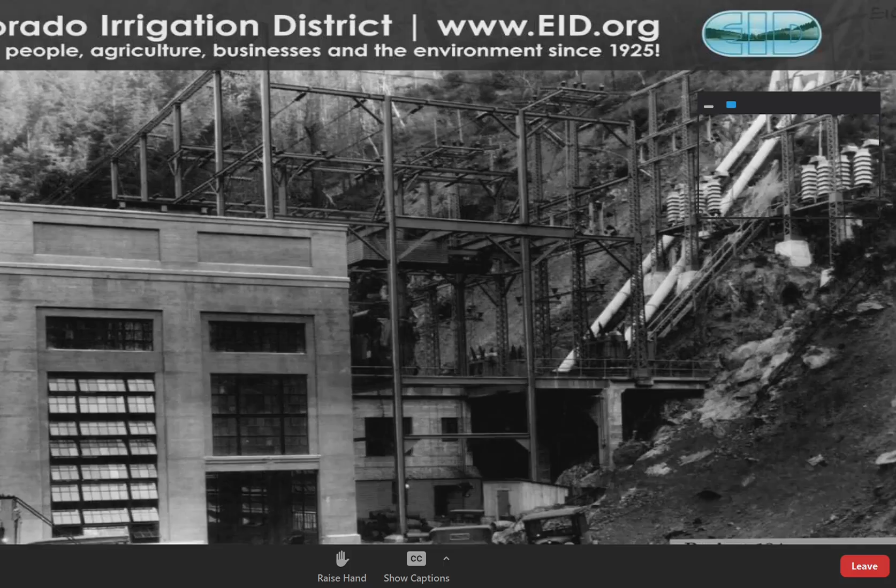Good morning, members of the board. Patrick Wilson, Drinking Water Manager, here to give you a little bit of background on the two recent transmission outages that we've experienced on the Diamond Springs main. Next slide, please.

The initial leak occurred on February 2nd, and it was actually on a blow-off appurtenance attached to the pipeline. Diamond Springs Main was built in 1961, originally constructed by the Bureau of Reclamation. It took treated water from the Reservoir 7 water treatment plant at that time and distributed it down to Cameron Park by way of the Reservoir 12 area, which is kind of above Bel Air, for reference, on Cameron Park Drive. This break occurred just on the other side of Ponderosa Road, between Reservoir 12, and it actually occurred on a standpipe, as you can see there on the right photo.

A seam failure on that pipeline, which is a normal occurrence, unfortunately, on that ductile iron pipe spool when the coating fails. So I did a count on the transmission lines that are constructed this way.

We have a total of 66 of these in the system, of which on the Diamond Springs main we have 24. That construction actually has the isolation valve at the top, as you can see there, and doesn't have it attached to the transmission main.

Current construction practices install that on the transmission main so that the blow-off itself, if there is ever a leak, does not require a transmission main shutdown to make a repair. Obviously, in this case, with the location of that isolation valve, it did require a transmission line shutdown.

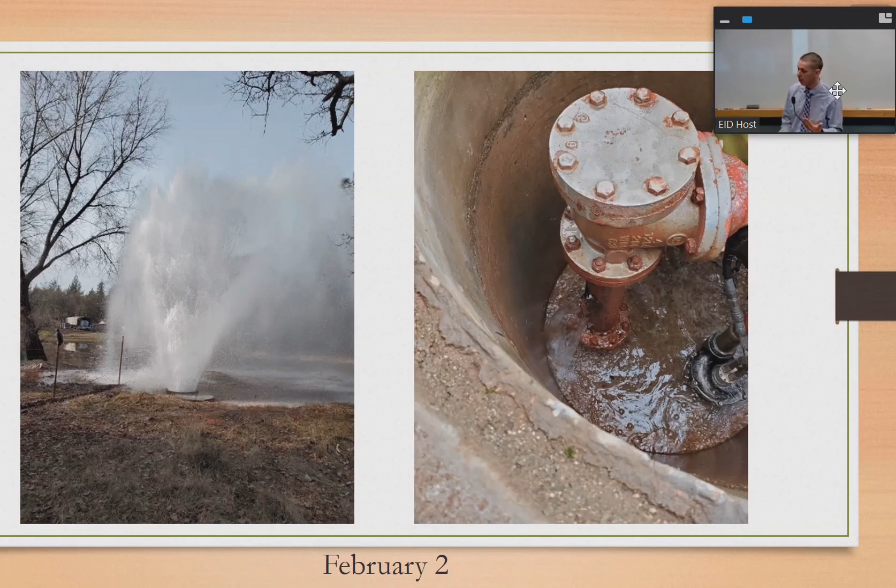It was determined that we needed to make this shutdown much sooner than we had anticipated when we arrived on site. Communicating with the school as well, we were able to come to an agreement on a shutdown for this particular endeavor, it's February 2nd, so Thursday of that week.

Next slide, please. Patrick, before you move on.

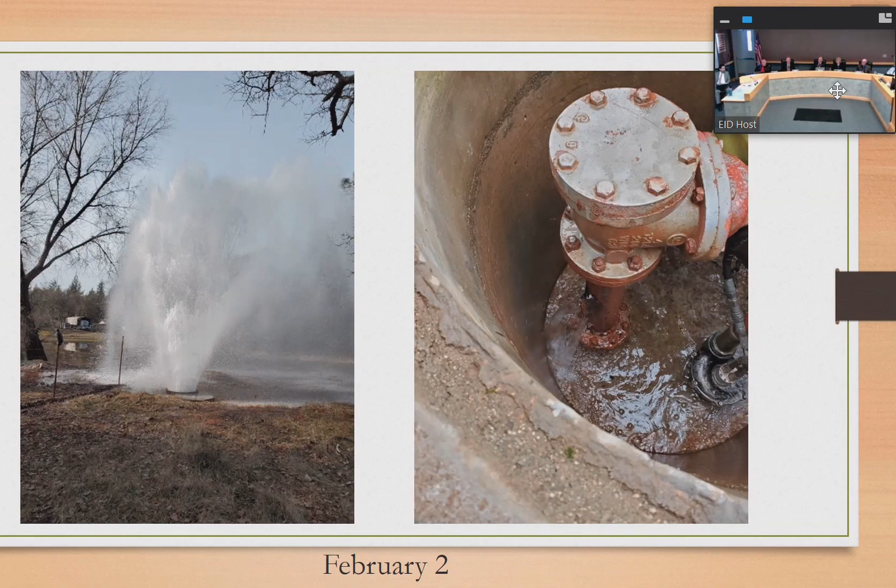Sure. You talked about the isolation valve in the vault at roughly, isn't it Highway 50 and Ponderosa about where that is? It's on the other side. So the Diamond Springs main kind of runs along Mother Lode for the majority of it, and then it actually crosses Highway 50 before the toy shop is kind of the best road reference I can give you.

Where the billboard's there, it actually cuts across in that open yard and then cuts across North Shingle through the backyards, subsequently where this pipeline is, and runs kind of basically parallel with Highway 50 at that point until it terminates at the reservoir. Seems like about a year ago, on New Year's Day or New Year's Eve, didn't we have a major leak right there?

Yeah, we had it North Shingle, absolutely, and I was going to get to that on my next slide. Sorry. No, it's all good, Director Dwyer. We'll get there. Yeah, if we could just go to the next slide, please, Jen.

So February 2nd was the Thursday. Subsequently, that following Tuesday, we recognized, between Reservoir 9 and Reservoir 12, we noticed a low pressure as well as Reservoir 9 draining, which subsequently told us that we had some sort of break in the pipeline. Along that pipeline, there are many turnouts.

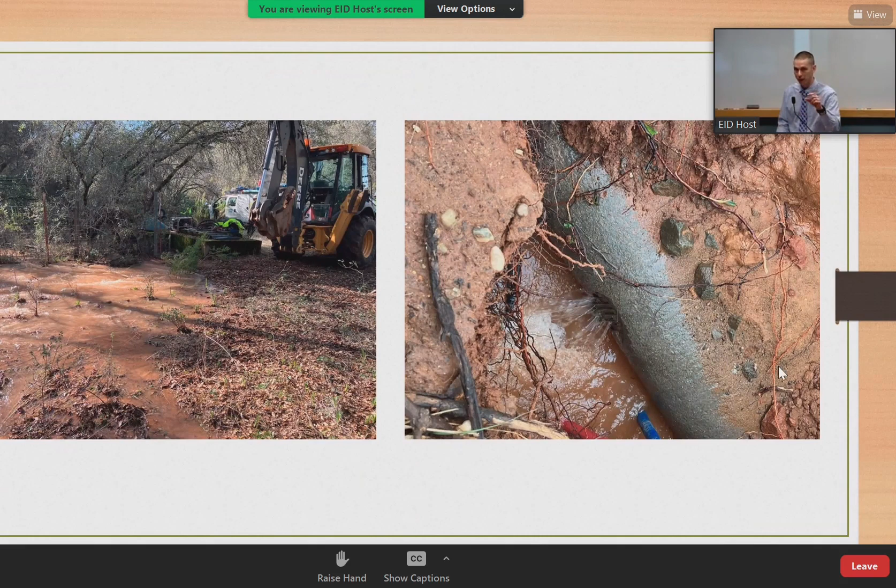Adjacent to the backhoe there, you can kind of see a concrete structure. That's one of the pressure-reducing stations that's along the pipeline. That station, there are 3 required in this shutdown. They require isolation as well as the former shutdown that we just spoke about.

Those are turnouts to other customers. Luckily, with that turnout, there's other ways to feed those customers. It's not a sole turnout. However, customers that are directly tapped, like Ponderosa High School off the transmission line, are subsequent to an outage, including those 180 customers. This repair, unfortunately, a little bit different than the last one, which was requiring just a replacement of a small spool section of 4-inch in nature.

This was actually a leak on the 16-inch line. This is a very strange leak for EID. Traditionally, what we normally see is a failure of the outside concrete on the pipeline, which allows groundwater to get in and corrode the outside of that steel cylinder on the outside of that pipeline.

However, in this case, next slide please, Jen.

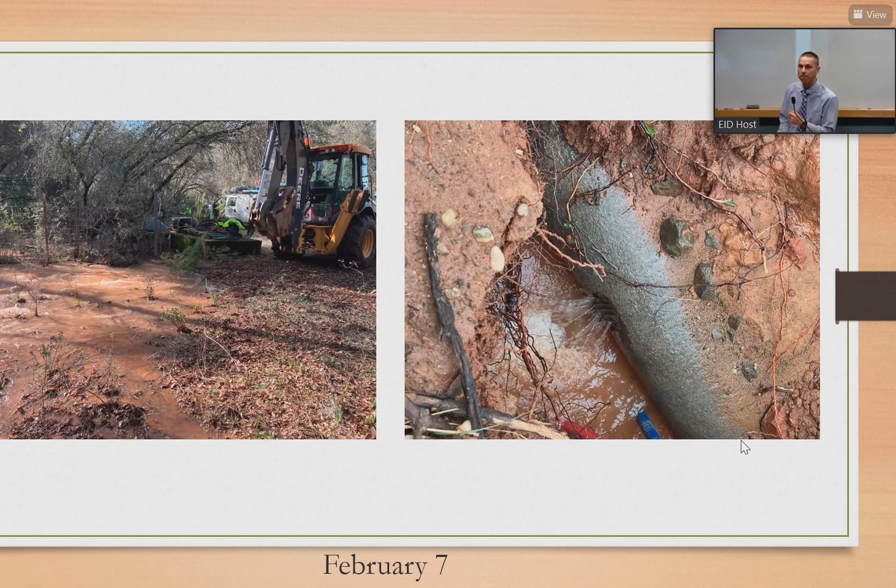In this case, it was an internal corrosion that had occurred, most likely from a failed installation.

The greatest challenge, I would argue, in installation of any of these concrete pipelines is really the actual bedding of the pipeline. The bedding consists of the grounding for the pipeline, placement of the pipeline, and then backfill of that pipeline.

What subsequently happened in 1961, not only with the Diamond Springs main, but also EDM1, El Dorado Main number 1 — both of those pipelines, for the majority of those installations, were backfilled in native material. The leak that Director Dwyer was speaking about from last year was actually a failure of the outside of that concrete mortar from a rock sitting on top of the pipeline from the original installation, which caused a crack in the mortar.

This instance is kind of the inverse of that, because it's actually a failure of the mortar inside the pipeline. That mortar failed most likely from installation or poor construction — poor application at the facility at the time. It's a little difficult to see in that photo on the left; I did my best to clean it up, but there's a bunch of mud shown on it.

That steel cylinder was pristine — it looked brand new. The bar wrap was also brand new. That led us to believe the internal corrosion had occurred on the backside. Looking at that location, we were able to see corrosion on the backside of that steel cylinder, indicating that water had been sitting there for a prolonged period of time.

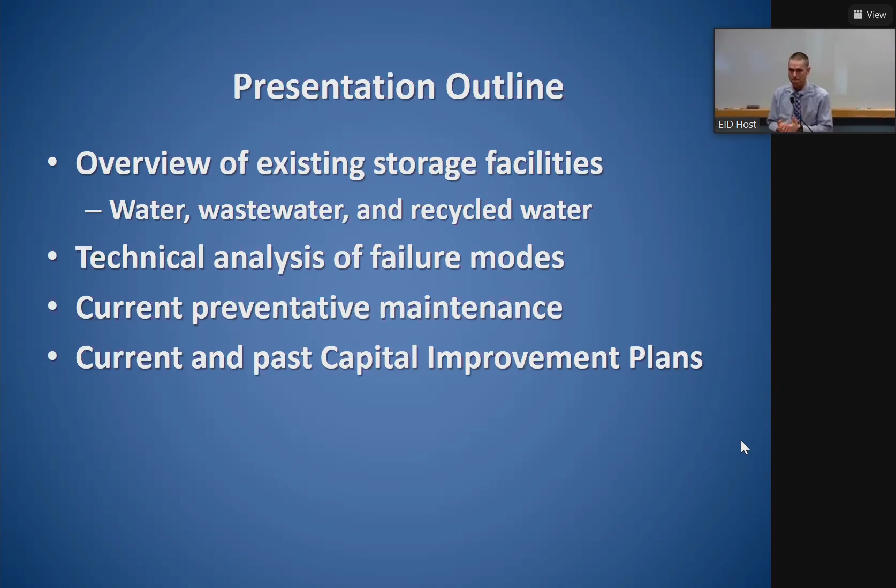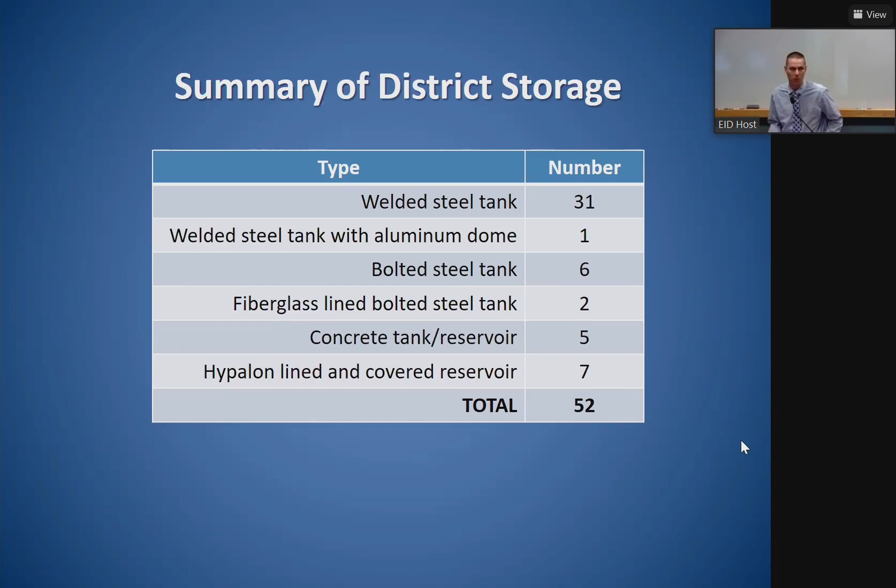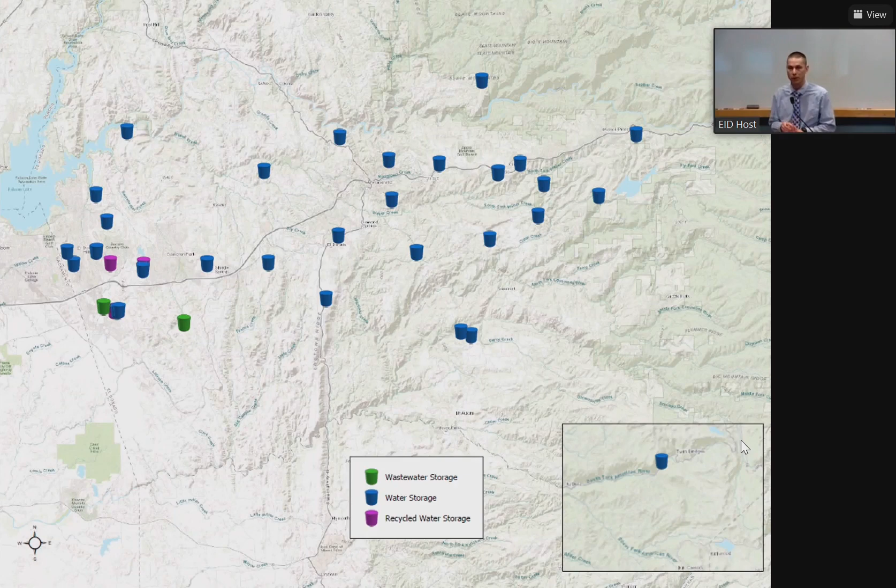Next slide, please. This is just an overview to show that we're spread out everywhere from Strawberry all the way down to the county line with storage, not just in drinking water, but parsed in there with wastewater shown in green and recycled shown in purple. Next slide, please.

Welded storage tanks, as I mentioned, we have 32 in total. They range in age from 13 to 63 years. The average life cycle, if coated every 15 years, the anticipated life cycle is 75, upwards of 100, depending on original construction material and selection of steel. 16 of those were constructed between 2000 and 2006, a lot of that had to do with the 1998 compliance order for open reservoirs. Obviously, getting away from that in the most cost-effective way was to install welded storage tanks.

As I'll get to later, there are some challenges with that, and some cost implications now. The industry standard, and part of that challenge, is to recoat every 15 years - that helps maintain the structure and mitigate corrosion. The district has not consistently met the standard, which I'll get to in a bit. We do perform dive inspections and cleaning every 5 years, and we have consistently met this standard. One of the main benefits of that diving and inspection is a routine video record, so we can look back at previous videos and also see any major changes - I'll get into one of those later as well.

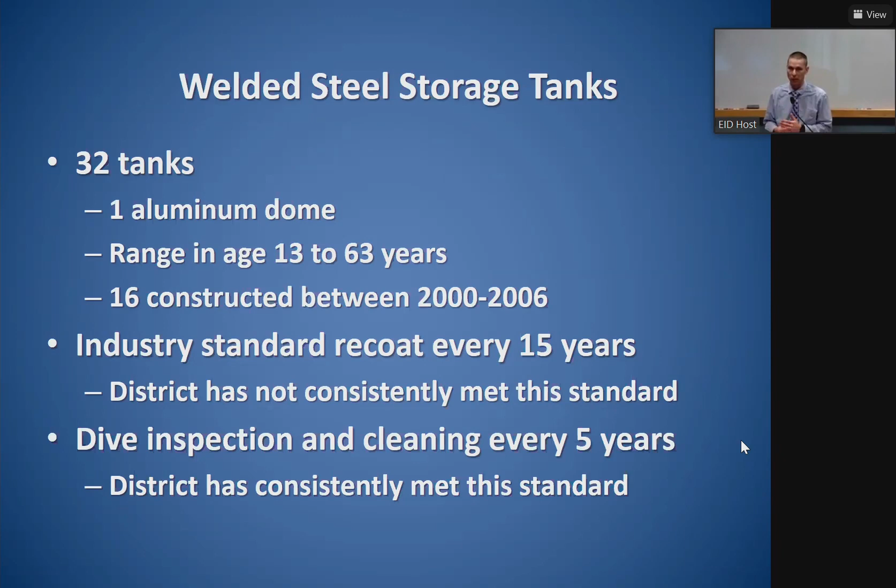Next slide, please. A brief recoating history: we started back in 2012 with Salmon Falls Tank, averaging about 1 a year. With the staffing changeover, we had a bit of a break due to retirement, and then in 2018, we picked back up again, and subsequently in 2022 and 2023.

One of the main struggles with this, not just a staffing challenge from a resource standpoint, is that having 16 welded storage tanks built in 6 years makes it very difficult to recoat those. You'd need to average 2.5 or so a year to recoat in order to stay on that same time frame. But it also lends to some of the financial challenges we have trying to adequately fund and maintain these reservoirs and tanks as we move forward.

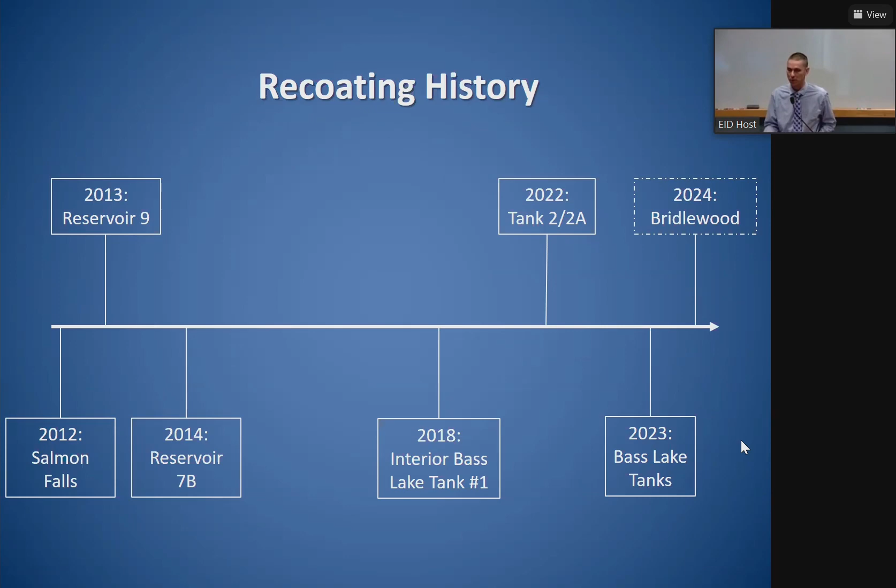Again, a lot of that relates to funding and staffing challenges. And part of it is original construction—we ended up owning 16 of these in a very short period of time, and trying to space those out into adequate, manageable chunks so we can recoat it has been a challenge. We'll get to that in a little bit.

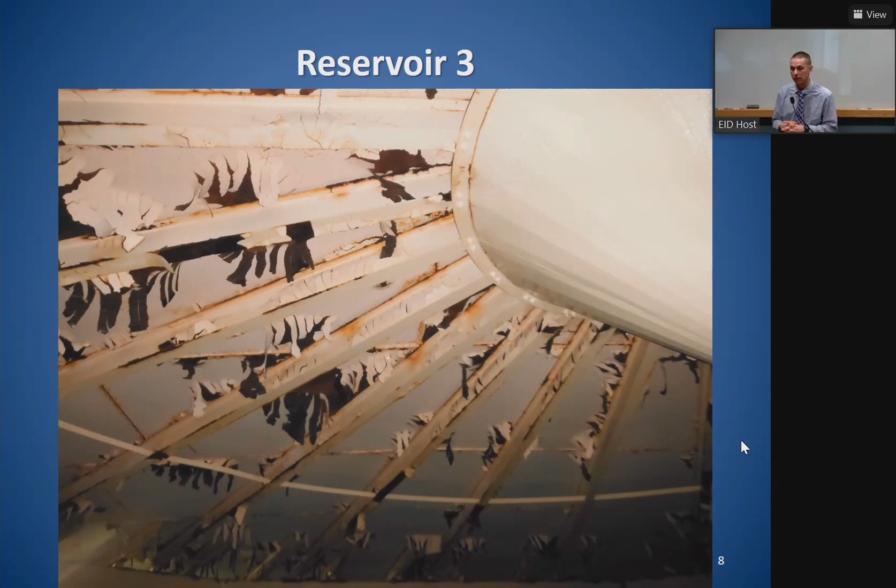So Reservoir 3, just to go back in time a little bit—and I'd like you to try to remember this photo for a later slide. For Reservoir 3, we had some failures of the coating, politely put, with delamination on the roof as well as the steel structure inside. With that delamination, the coating and steel itself fell to the floor of the tank, requiring a complete rebuild of the actual roof.

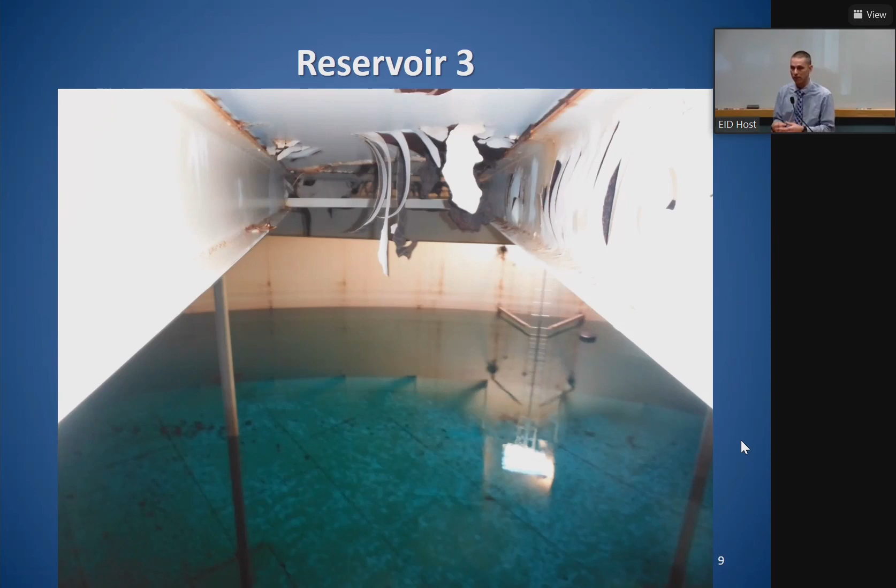To elongate the life of that steel structure, we add an aluminum roof. As part of this project, we actually had to add an additional top stave—a stave is essentially just a level, like in a house. That top level, above the overflow pipe sticking out there, was added for a multitude of reasons: one to adhere to installation of the aluminum dome, but also because repairs were needed to the actual steel structure itself. So we had to repair part of the original steel that was there in order to add the aluminum dome.

That aluminum dome will more than outlive the remaining life of that steel structure. It's a far superior product going forward, and where possible in the future, the district is advocating to do that on reservoirs and tanks. One of the challenges we got into, which we'll cover in a moment, is there are some limitations to the aluminum dome application—it's not one-for-one, not one-size-fits-all. Original construction sometimes hinders the ability to install the aluminum dome. The larger the diameter, the more challenging and costly it becomes.

Patrick, isn't there some—if you back up one—isn't there some public relations challenges with doing the aluminum dome in terms of aesthetics and reflection? I think that's nicknamed Jiffy Pop. It is, isn't it? Okay. Thank you. It's the one you like. It is the one I like.

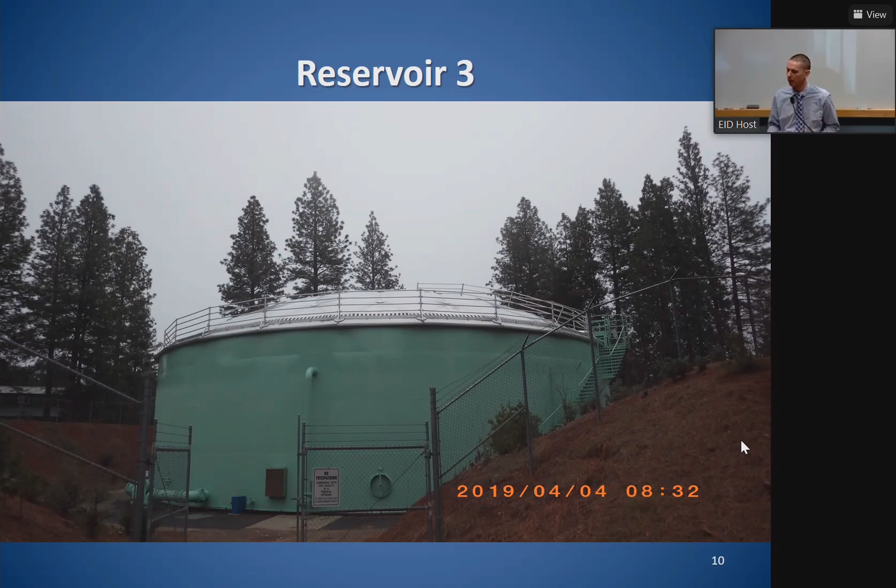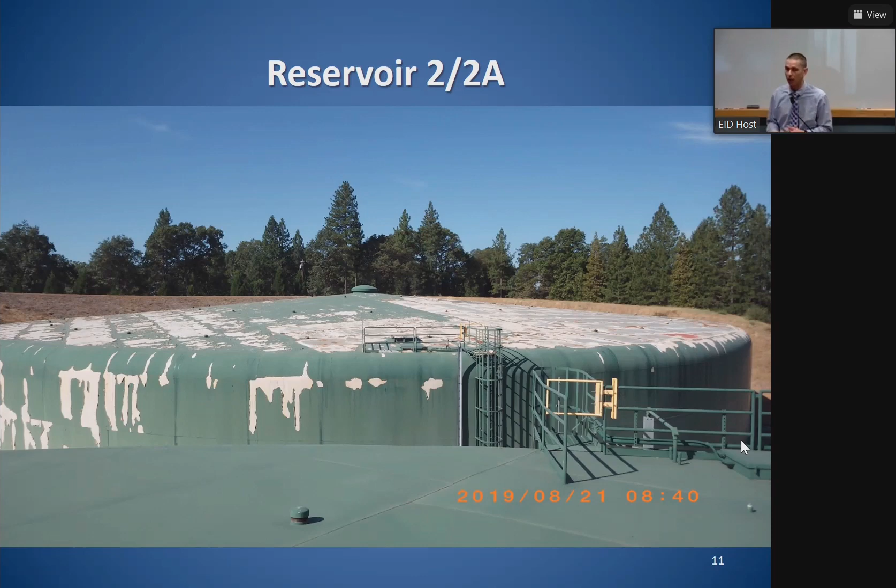So I'd mentioned, obviously Reservoir 3 with the coating failure, Reservoir 2, which we're all pretty familiar with most recently from a recoating perspective. This structure itself, obviously the coating failure occurred long before we ever got there to actually perform the recoat. This one initially, that's Reservoir 2A in the background there, and then we're standing on Reservoir 2 itself. That external failure was actually not the worst part of that structure. Reservoir 2A had internal delamination on the steel I-beams that required full replacement of about 36 inner I-beams, as well as a handful of middle and outer I-beams, as well as a recoating of the inside of that structure. However, Reservoir 2, next slide please.

Wait a minute, before you go back up one again please. That knife has cost this district a lot of money. So, as an effort to save some money, I brought you a ruler. That, number one, it shows up better in the photos, but it also will accurately describe the situation. And you can cut that in half so it'll fit in your pocket protector there, your engineer pocket. It's the right color for tomorrow, right? So we had to zoom in to see.

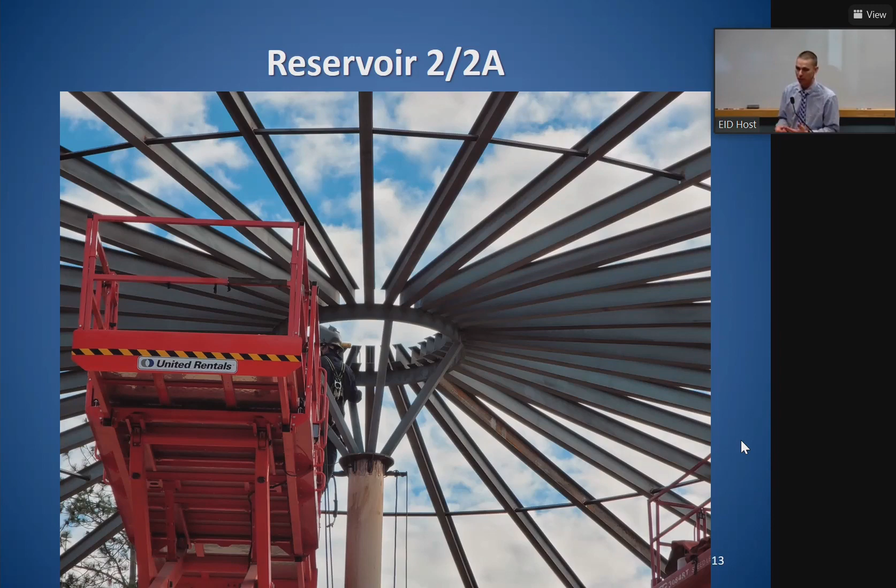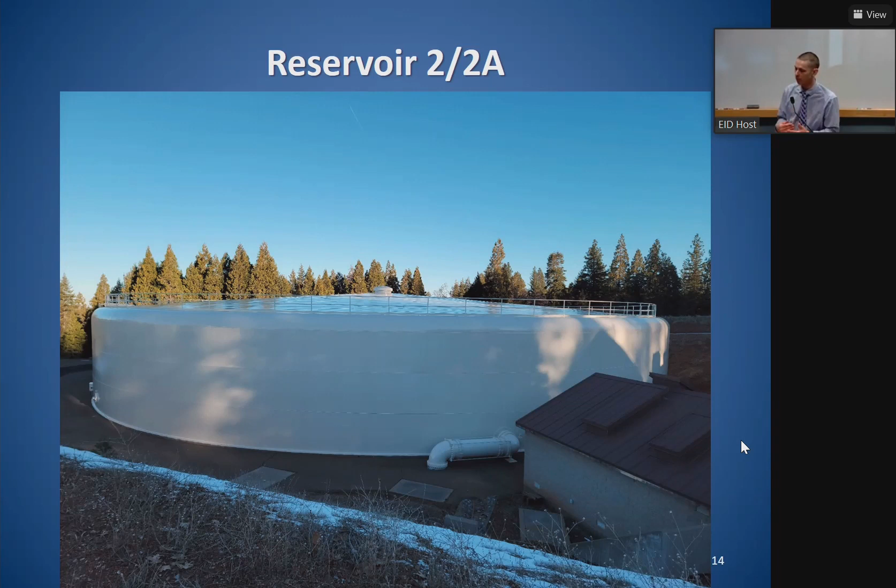And I've referenced the aluminum dome conversation that does go on, and we did actually have it during this review process where we move forward with the steel replacement. Due to the diameter of this reservoir, it was going to be very costly in order to retrofit it. The initial foundation and that design was not really privy to the removal of that roof. There was a lot of structural components that were tied together to make that structure stay upright. So with this project, we replaced it obviously in kind, but the significant difference that we have done now as opposed to the original construction efforts is we did coat the top flanges of all those I-beams, which led to the initial corrosion. The roof is free-floating, it moves across those I-beams. That coating is really the only thing you have to kind of save it. And without that, it was just rubbing through and creating extensive corrosion initially just from original construction.

I have a question. Okay, now that you've redone that, what's the warranty on this? There's still only a 1-year warranty on recoating. Okay, but how long is it gonna last? So every recoating is 15 years. For sure? I know you previously said one did not last that long, so.

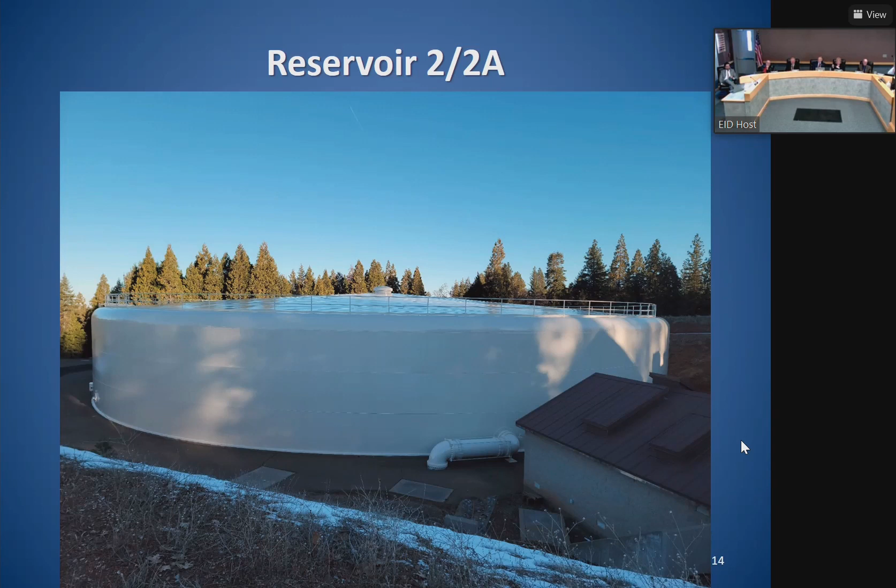Correct, absolutely. So that's the biggest struggle with welded steel reservoirs as opposed to concrete. With welded steel, there are so many options for recoating, and so many options for failures, challenges with those. It can be anything from simple paint adherence to dehumidification not properly working on the day of application, to off-gassing of the paint not occurring adequately. There's a lot of what-ifs that go along with that. However, in terms of coating application, adherence to specifications, and mitigating those potential risks, these reservoirs, as well as the ones we're doing going forward, are adhered to much more stringently than they were from the original construction. I will not tell you that any coating is bulletproof. I'll tell you concrete's near bulletproof, but I won't tell you that any sort of coating is bulletproof. But we did everything to mitigate and will continue to do so to mitigate all those challenges going forward.

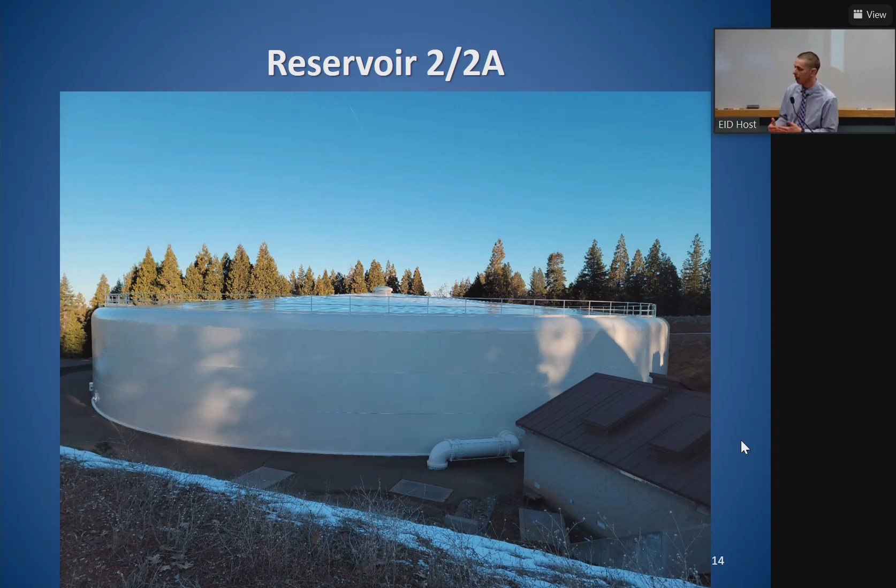They're there, and we're aware of them, as well as our coating inspectors, which in my opinion have done a great job since Bob took over. We've done a great job of having that conversation with them and understanding that level of detail, and we only hire those that do the greatest job for us. There's a very tight process we go through with requests for proposals as well, and we do a great job of vetting that to mitigate all those risks going forward. Thank you.

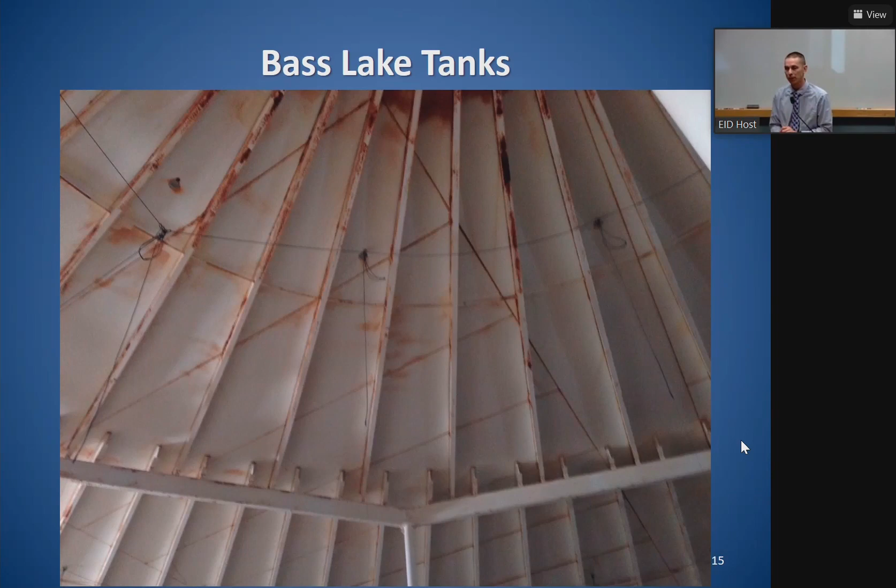Similar to Reservoir 2, but only completely different, is Bass Lake tanks, in that a very similar window when these tanks were constructed. As you can see, this is from Bass Lake tank number 1 when we recoated it back in 2018 - very minimal rust, as opposed to the complete delamination we saw from the famed knife in the previous photos. That's really just surface rust within Bass Lake tank number 1, not actually corrosion to the point of full replacement or repair.

I think that's the major difference - being able to get back with adequate coating inspection, which was performed on Bass Lake tanks, although again the top flanges were not coated on this tank as well. But getting back to recoating this and getting it into a period where we can minimize our challenges with the recoating process and minimize repair and replacement - that's the future, and that's the goal we're striving towards.

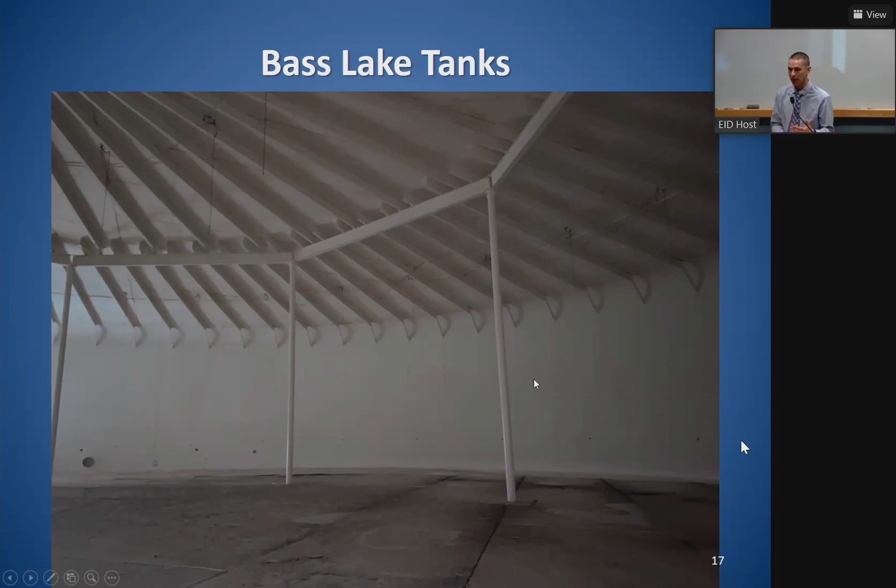Next slide, please. With that recoating comes a substantially truncated project. There's no steel replacement within Bass Lake tank number 1, and ideally in tank number 2 as we get into it in the next month or so. With that, we'll be able to do a much better job of maintaining these structures and staying on that recoating window.

Next slide, please. Along that line, in the board packet I went into a lot more detail, but I thought this one did a great job of explaining the challenges and where we're at.

From the initial Reservoir 2, as I mentioned, that required the full roof replacement. The project cost, with change orders and bid results, was about $853,000 per million gallon.

As opposed to Reservoir 2A, where we had some structural repair - replacement of a handful of I-beams - that was around $500,000 per million gallon. And if we hadn't had to do either one of those, we would have been around $386,000 per million gallon to recoat those tanks.

So being able to get back to recoating those on the adequate window of every 15 years, and maintaining that goal with sustained funding, will help us mitigate these immense costs, because not only do they cost more than double, but it's also the time commitment of having these reservoirs and tanks offline.

Luckily and conveniently at Reservoir 2, it was - I won't call it a simple system - but it was a relatively truncated system to manage. There were obviously challenges at Reservoir A water treatment plant in order to maintain level, however it wasn't something that was insurmountable, clearly.

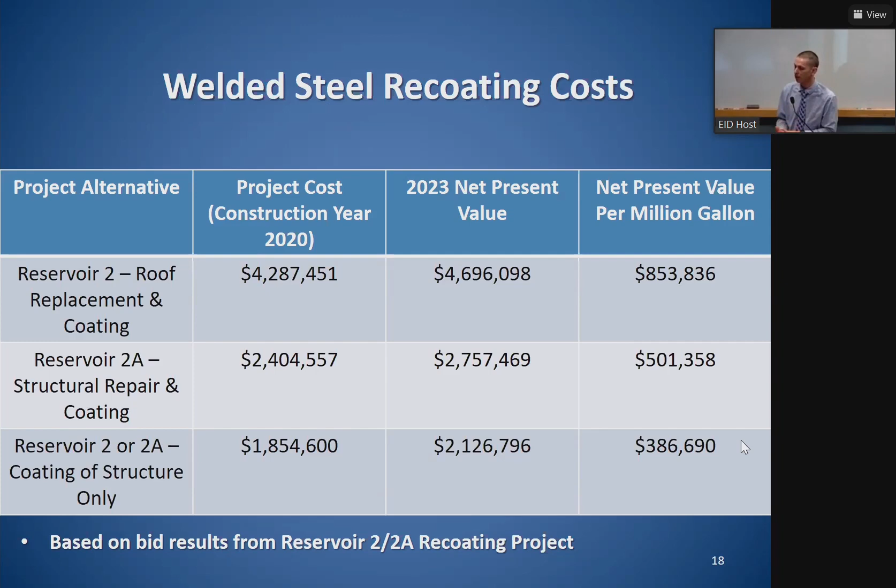If this had been at another tank site where potentially we didn't have as many options to maintain storage and the efficiency of the system, that would add additional difficulties to staff and potentially a lot of hours to maintain and keep service going. So a lot of this has to be looked at not just from the standpoint of the hard costs, which clearly we can see, but also the soft costs that go into operating the system and maintaining it as we go down the line.

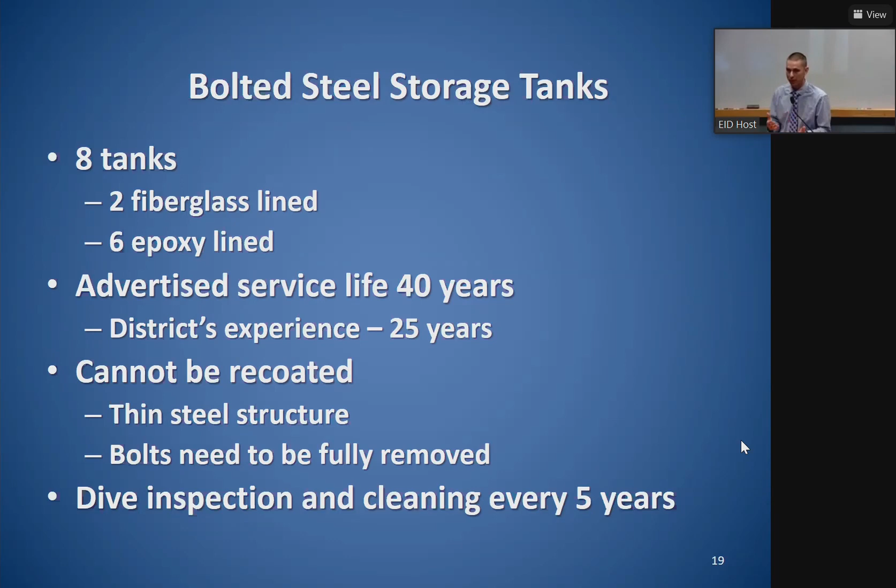In line with the rest of the system, we do continue dive inspections and cleanings every 5 years.

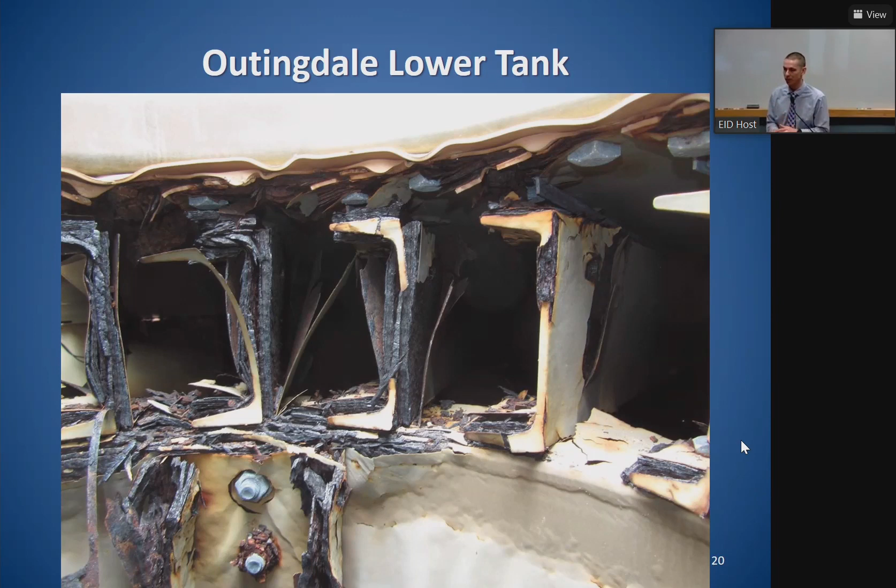One thing that spoke volumes to me about this slide, and the reason I kept it from the old Outingdale lower tank conversation, is the C-channel. I've been talking about I-beams in the welded storage tank - that's all a composite structure as well, and it plays out just the same as the bolted tanks in the way they load shed and the structural components work together. The C-channel is a much more cost-effective approach, however it's not very strong and sturdy long-term. It's subject to a lot more external corrosion due to the challenges with how the C-channel is adhered to the structure, as well as how the roof moves on that structure. So really, corrosion is going to occur in bolted steel or welded steel no matter what we do - it's really just a coating effort that we're after with all of these.

As some of the board may remember, just to the right of center of that structure, that's not a fifth support member - that's actually one of the roof supports that fell into the tank itself in Outingdale. That's part of the struggle with the C-channel - it just does not have the structural integrity you'd see in a welded steel tank.

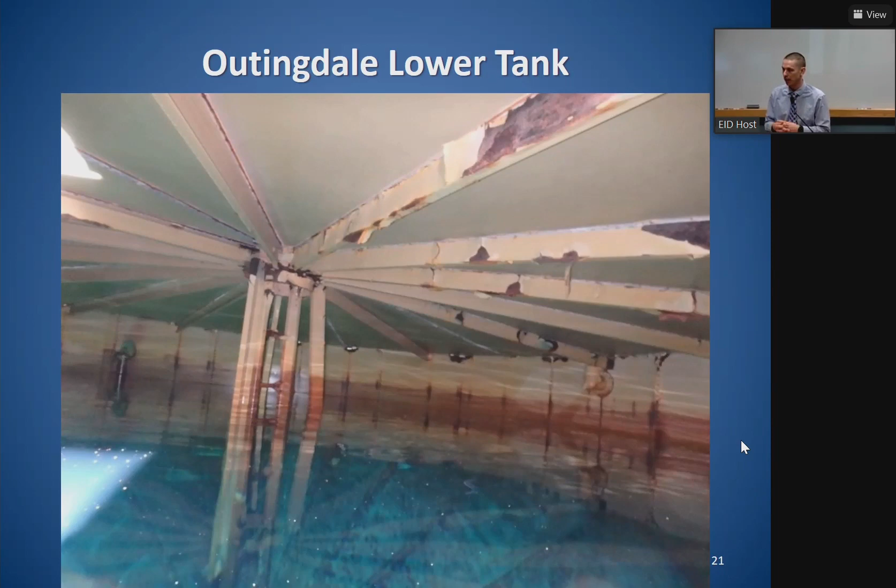With that, it's a one and done structure. There was really no way to repair it cost-effectively to extend the life of the Outingdale structure. Therefore, a full replacement was required at that site.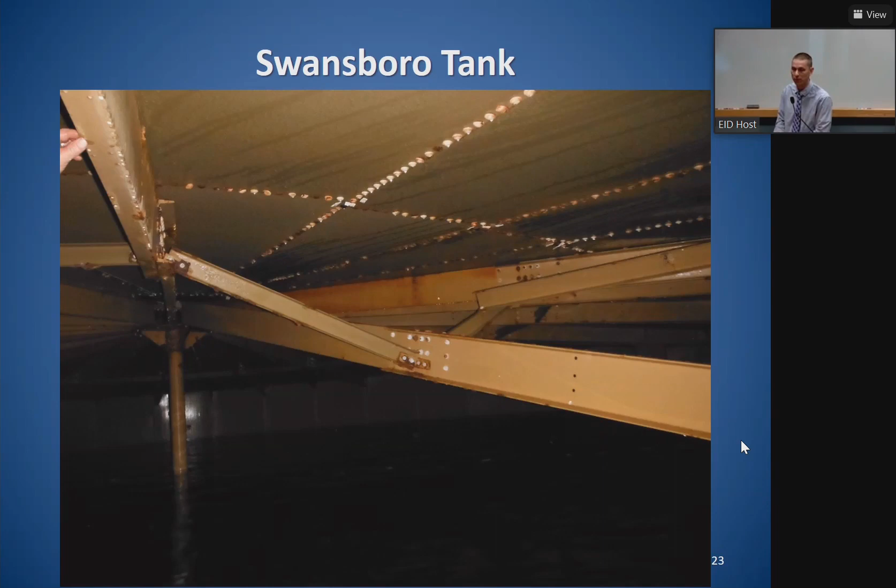To pivot a little, Swansboro Tank subsequently also had a C-channel roof rafter that failed and fell down. However, a little bit different - we were able to get to this tank in time to repair just the top stave, that top section, and we did a full replacement of the roof as well. That structure, at the time, was around 20 to 25 years old. We're anticipating to get another 15 years out of it, so we're still only going to get to 35 of the prescribed 40 years that comes from the tank manufacturers.

Even with that time frame and the replacement we did, there's still a lot of - as you can see, the bottom two staves are still there with their original coating, and those are still going to continue to be the largest challenge we have. That's where our leaks are going to occur, and that's where the welding is going to occur to maintain that tank going forward. However, that is the most cost-effective way to keep that structure in service, and it was an option at that time instead of a full replacement.

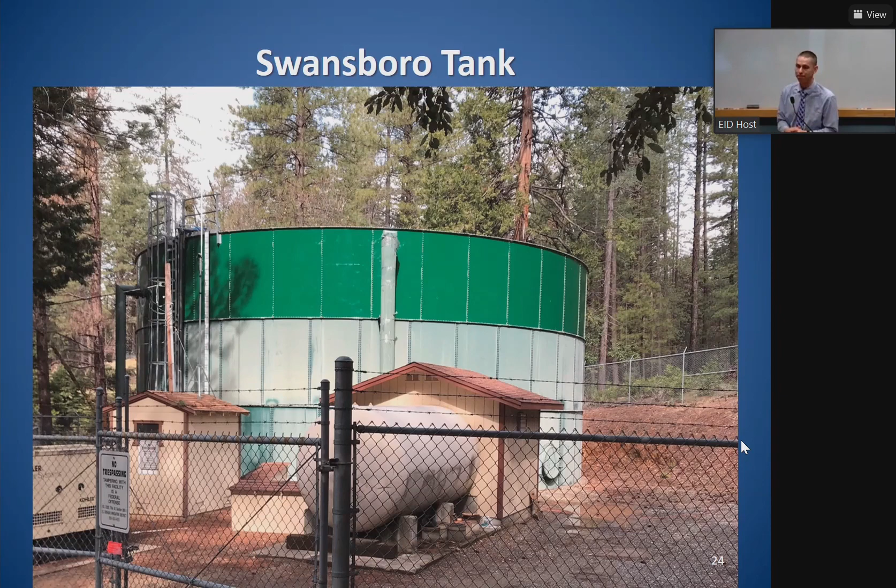So I spoke a little about fiberglass lined tanks. The difference between fiberglass lined and epoxy lined is that you have a fiberglass liner inside the tank - it's actually fused to the steel shell. That's all that it is, and it actually goes through the bolt holes itself, so it's got fiberglass in between the panels. That's great in terms of corrosion, however it does present a different challenge, which is shown in this photo - it still requires a significant amount of maintenance in an effort to mitigate any potential for leaks.

So we still have to coat every one of those bolts as well as every seam, because with that fiberglass, it's not a perfect closed structure. So there is a gasket there, but it's not a guarantee that in time it's not going to leak. So there's a relatively routine effort in recoating each one of these bolts and these seams to maintain the life of this tank. The glass, they call it glass fused, it's a fiberglass lined. The whole premise of this was to elongate the life cycle of the replacement of these tanks. That does come obviously at a cost with the repair and the maintenance side of it as well.

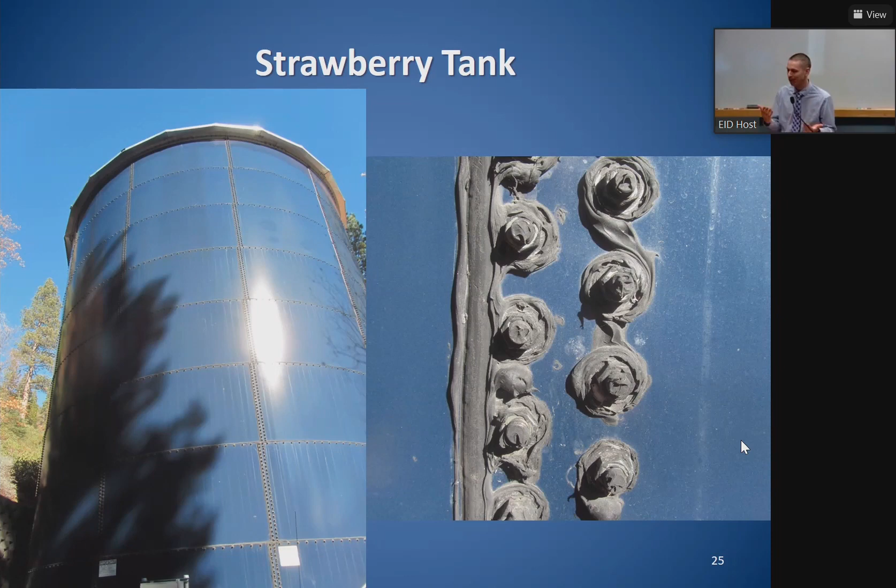And I think that the idea of fiberglass is great, but the actual application of it still isn't there yet, unfortunately. This was installed in 1993. We have one that was installed around 2005. It's subject to the exact same leaks that we're still seeing today on both.

Next slide, please. So Hypalon storage reservoirs, we do have 7 of these. These are the floating covers. They range in age from 31 to 34 years, and they're far beyond their design service life.

So each one of them was subsequently put in somewhat different phases. So they were grouped together, 2 different groups. And each one of them had different materials that were selected in terms of the thickness and the actual UV resistance that was installed back in that time frame. So some of them are performing better than others.

However, the overwhelming majority do have a significant O&M maintenance side of things that is very challenging. So with the floating cover operations maintenance manual that we had to put together for the Division of Drinking Water to continue to maintain and operate these, it really limited us to the operation of these reservoirs. You know, with any major fluctuations, you risk the ability to tear the cover.

And so one of the things that we do is we do have a tendency to keep these reservoirs a lot more full than we would a normal welded tank, bolted tank, that kind of structure, which adds to the water quality challenge side of things with actually maintaining water age and so on. So these are really, they're very difficult to operate in the sense that you have a very limited window to operate them in. Obviously, in an emergency condition, you're going to use the water. However, on a day-to-day operation, you're really shortening up your operational characteristics for them.

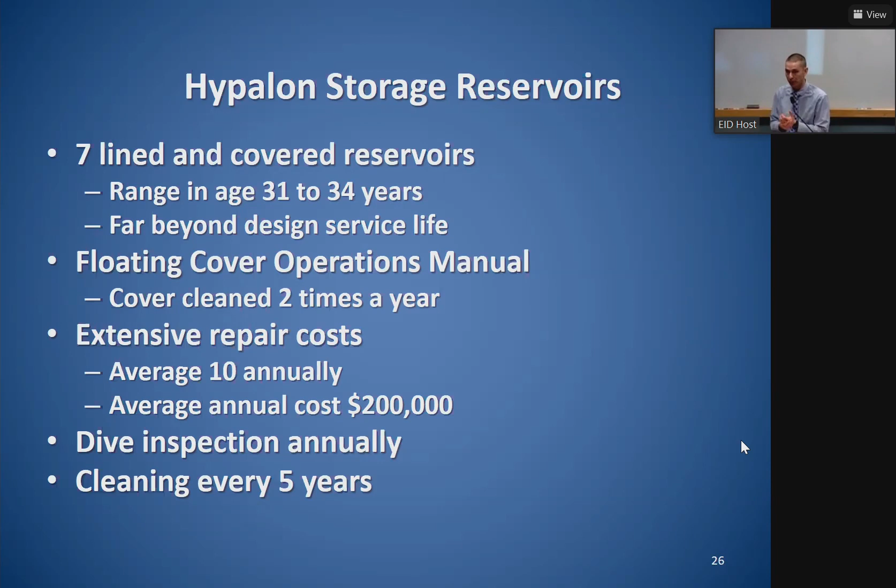Next slide, please. So Reservoir 1, this photo was taken back in 2017. This is part of the water treatment process, just to give you a little bit of background. So coming out of the filters, the water comes across Gilmore Road and into the Reservoir 1. It's a clear well as well as a storage reservoir for the district. With this Hypalon cover, it's well beyond its life cycle. In fact, this is probably the worst plagued one that we have at the district. It is in the CIP, which I'll get into a little bit later.

These leaks, and much like this one shown here, this is October 13th, and it has not rained all summer, just to give you kind of a reference there.

So those are the kind of leaks that we experience externally on these, on the top of the floating cover. And that requires actually, in some cases, a diver to go in and patch it from the inside, depending on the severity of the leak.

Next slide, please. And Reservoir 11, this is actually multiple weeks after a storm. In fact, this was after the last major storms that we had in January, towards the end of the month. One of the things I wanted to note here is those aren't leaks, that's actually ponding of water from the rain.

So the other struggle that we have with the Hypalon covers is actually getting the rainwater off. In the higher elevations, we struggle with whatever pumps or siphons that we have to get the water off. They plug with pine needles.

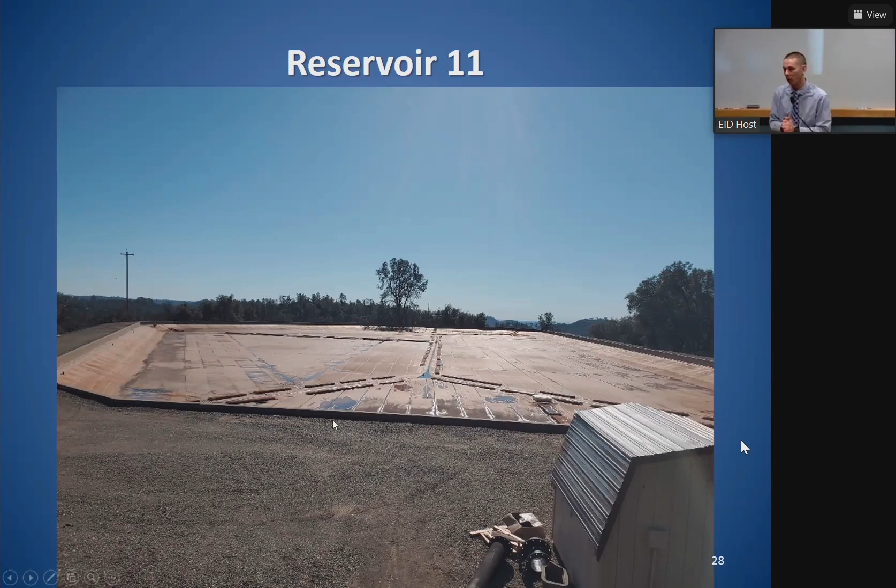In the lower elevations, we have trouble actually getting the water into the troughs. That's just by design. The troughs are shown there, and they kind of act like a gutter on a roadway where they concentrate the water to a location where you can remove it. Well, that water, as you can see, didn't get its way into the trough. You can see just a couple locations there where the water's just sitting on top, adding more and more challenges to these floating covers.

Next slide. So, concrete tanks and reservoirs. We have 5 concrete tank storage units: 2 tanks, 1 reservoir, and 2 water treatment plant clear wells. They range in age from 18 to 34 years and have had minimal maintenance costs since their original installation. The vast majority of it has been preventative crack sealing and minor crack sealing on some of the clear wells. We do dive and inspect every 5 years on these as well.

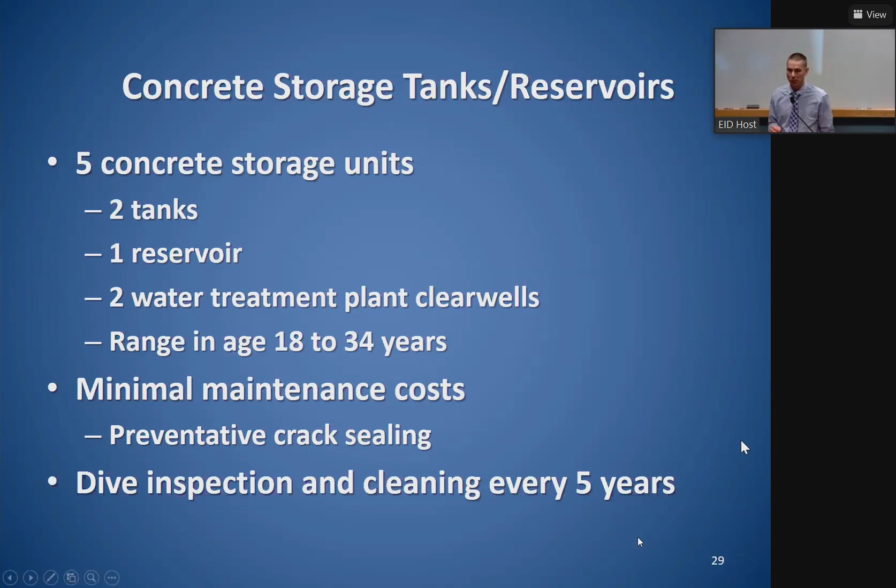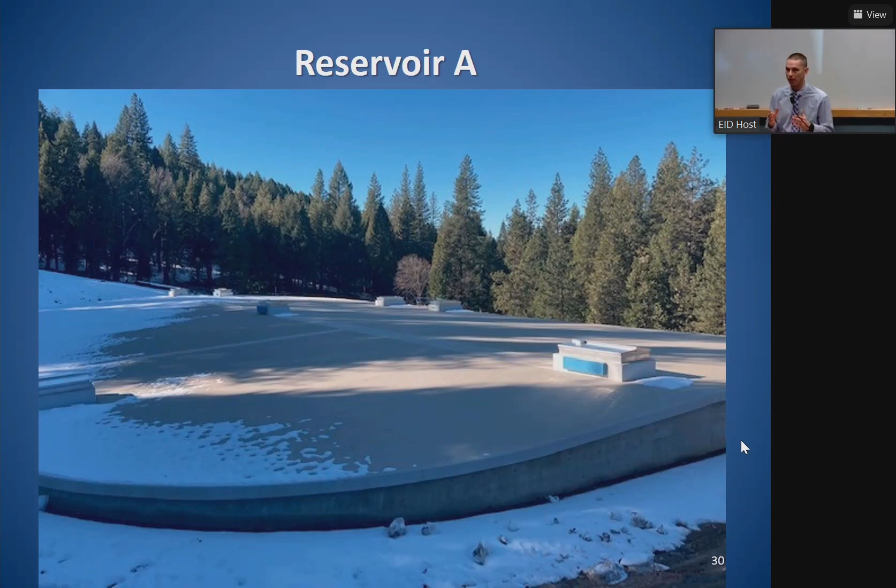Next slide, please. So Reservoir A, a little difficult to see with the snow, obviously, but we actually did a preventative coating on top of this one for crack sealing, so we sealed up all the external of that concrete in a very cost-effective way. We did it in-house. It was a small construction project over a couple of weeks. As time permitted, we completed that in-house without any sort of bidding, that kind of thing. Very manageable from the crack sealing perspective at Reservoir A.

Next slide, please. And Reservoir 12, so Reservoir 12 is kind of a different structure altogether. It's pre-stressed, which I'll get into in a couple slides, a structure that is really kind of the future for El Dorado Irrigation District. These structures are pre-stressed during construction, so they actually hold the concrete to itself. And then the roof actually has that gravel laid across the top of it, which is really an energy dissipator for that structure to help mitigate during rain events.

And with that structure, one of the main reasons, obviously being Reservoir 12 Cameron Park, one of the main benefits here is we were able to bury the structure right back. They don't have to be buried. In fact, the one I'll show you a little bit later is an open structure, just like any tank that you would see today at the district, welded steel or bolted. These really do a great job of interconnecting all the, if you want to call it, futuristic avenues that we have with concrete and rebar, in an effort to meld it together to make really an impermeable structure that will last well over 100 years.

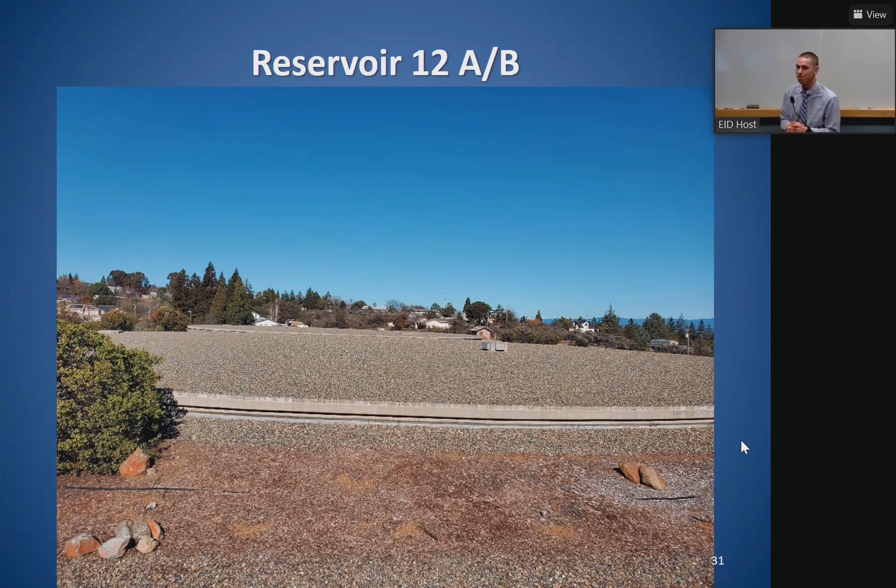However, if you just look at the structure itself and see the external costs from just recoating, it is very expensive long term. Years ago, when the district initially constructed a lot of these welded storage units, we were pushed that direction because of cost, since pre-stressed concrete hadn't really turned the corner yet. In 2005, we did Bass Lake tanks and Reservoir 12A and 12B, and that cost was substantially more than what we had paid for the welded tanks at that time. But going forward, especially with the cost difference coming down substantially with pre-stressed tanks, that's the direction we're advocating to go when necessary.

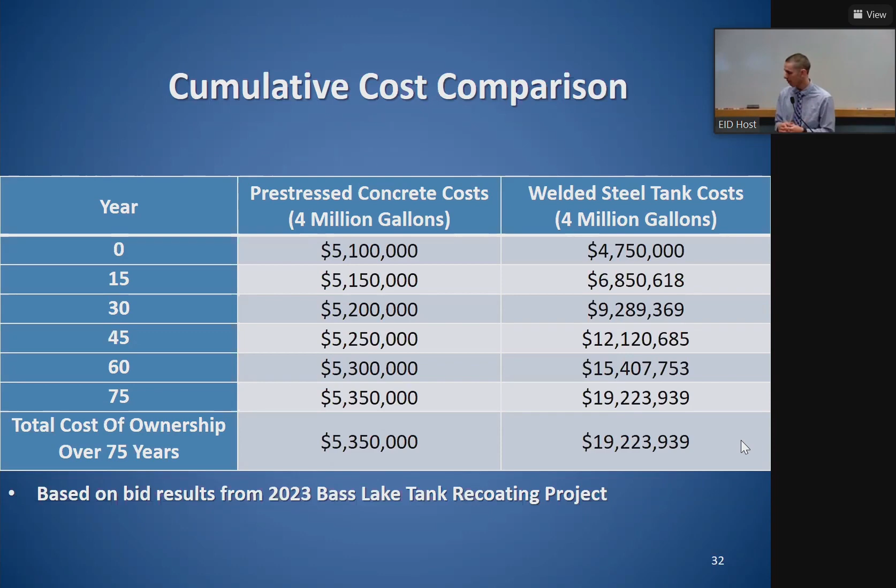That's where it's tied to itself to hold the structural integrity. At the completion of tensioning, they put a concrete external coating over that rebar. The concrete is monolithically poured internally, so there are no cold joints—it's a continuous pour. With the rebar tensioned on the outside, it adds a secondary source to make that composite unit, creating a very strong structure that won't be subject to the challenges we have with welded steel tanks.

The recoating for these is very minimal, if ever, depending on the construction. Additionally, with that composite structure and monolithic pour, leaking is very minimal. Years ago, the knock on concrete was that eventually it's going to leak. But with the monolithic pour, the base and foundation for that pre-stressed structure is actually cast into the sides, so it's all one unit.

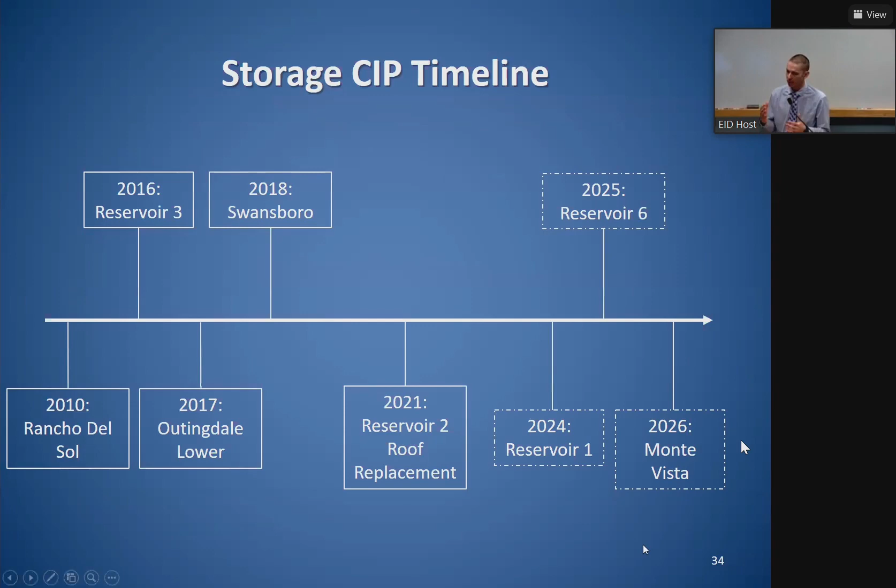Reservoir 6 has its own fair share of challenges. It was part of that grouping of 2000-2006 original construction of welded steel tank. It's been exposed to a lot of challenges with initial construction methods used there, as well as coating. That structure may not be savable depending on some additional review. It's likely that may have to be fully replaced depending on costs, which we'll come back with later.

If you remember the photos of Reservoir 3, I didn't have a great one showing that, but that was a very similar failure mode we had in Reservoir 3, where it required replacement of that top stave, that top section, with that aluminum dome. We're very much potentially looking at the same for Reservoir 4.

We will regroup this August, obviously. We'll do a complete review of all our tanks and see if there's the ability to move this up, to try to mitigate that challenge of not having a full replacement need, but potentially catch that beforehand. Obviously that's going to require some moving of items and an adjustment to adhere to that kind of schedule. That's part of the challenge we have - not just the funding, but also the staff resources to complete that project.

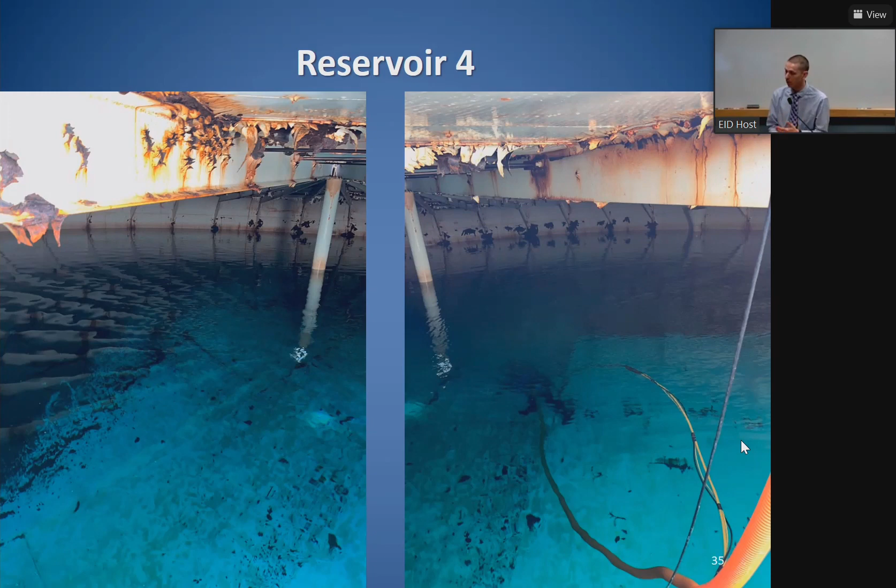This is very much going to be a one-off project from the standpoint of if we do move forward with an aluminum dome here and it's acceptable. It's a very detailed project, design-wise as well.

So in conclusion, each material comes with its own challenges. Obviously there's costs associated with it, amongst all others. Staff is going to continue to evaluate all factors going forward. Along with the mission statement and guiding principles, we're maintaining service and meeting regulatory standards. We'll propose full replacement or partial replacement when necessary, depending on the structure and the condition they're in, on a case-by-case basis.

With continued deferral of maintenance, there's additional costs for repair, and as mentioned, full replacement depending on the structure itself. The proactive approach towards projects is the direction the district wants to go. This requires sustained annual investment to recoat these tanks to mitigate that challenge, so that we're not replacing full roofs, that we're not jumping head over heels into a project we really didn't need to. Something like a recoating project maintained for 15 years is a much more viable approach.

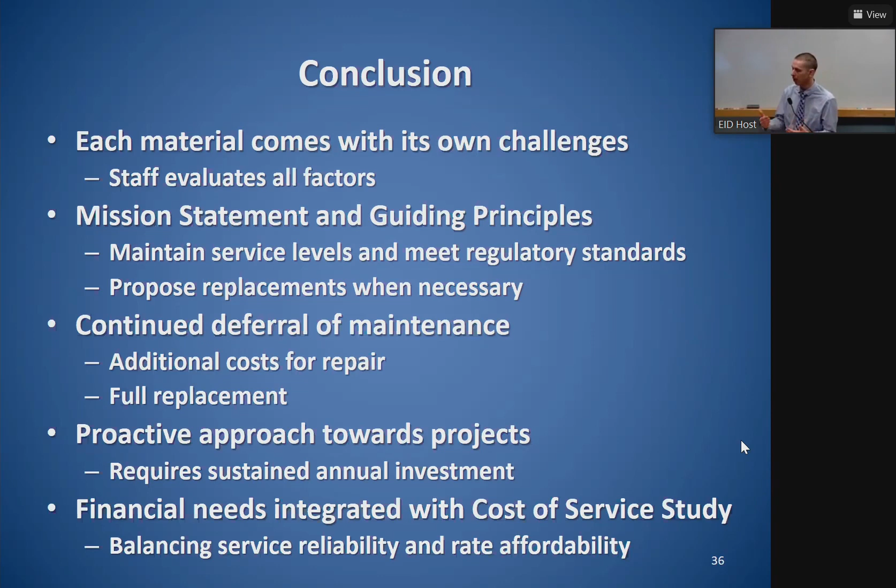With that comes financial needs integrated with the cost of service study that will be taking place. That way we can balance service reliability and rate affordability going forward. Not asking for it all at once, obviously. With those 16 tanks, we're going to have to figure out a creative way to space that out and mitigate those challenges. But there's more to it - it's maintaining that going forward with that same annual investment to complete that work.

Are there any questions? Yep, I got it. Director Osborne.

When we have to take the system offline to redo the tanks, what's the construction time for the bolted tank versus the pre-stressed concrete tank? Is it a substantial difference, or? Director Osborne, did you mean the welded steel? Welded, yeah, yeah, okay.

So the concrete tank, that particular tank in Roseville, it all kind of falls back into the line of the foundation that's originally there, and the soil from the geotechnical analysis that was originally performed when the original tank was constructed.

That's really going to lead into the duration. So if we have to do over excavation, for example, for a concrete tank, that's going to obviously add costs associated with that project. However, it's mitigatable over the lifespan of that structure.

The recoating window traditionally for a welded steel tank without any structural repair is about 8 months. Sometimes it's closer to a year depending on size. Anytime we have to do any structural work, we're obviously well over a year at that point, and that's when it gets to be even more challenging on the system.

So the construction time, is it a substantial difference between the two? Yeah, because you're going to still have to remove the old structure as well, so you're going to have to elongate that time. However, the soft costs long-term are going to be much less. Oh, yeah, of course, obviously.

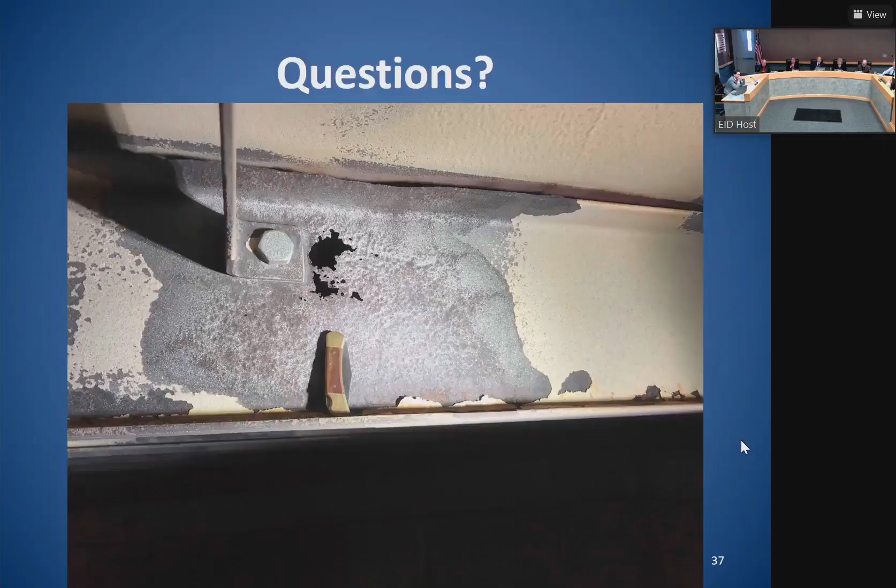Okay, so I'm here this morning just to give a brief overview per the board's request on our 2022 water transfer proposals and actual implementation, and what that meant to the district.

So the three relevant board actions to today's discussion: first, in June of 2020, the board approved its third water transfer agreement, which ended up being the most successful to date, primarily based upon hydrology that year, wherein we were able to transfer 8,000 acre-feet. Then in January of last year, as Brian had described, as staff was continuing to recover from the Caldor fire and bring the canal online, in recognition that we were going to begin saving or conserving that water through the main ditch project, the board adopted a resolution of its intent to retain control of those water rights. Finally, in June of last year, the board approved its most recent water transfer agreements.

And I've already discussed that, that's why I'm here, because you asked me to be here.

Quick overview: water transfers as a whole are definitely a very valuable non-rate, but volatile, revenue source. And obviously, as we discuss today, it'll become very evident why that's the case. But most importantly, we never propose a water transfer unless we can ensure we can meet our district's customers' demands, not only this year, but if drought conditions were to continue. And obviously the board recalls that June of 2020 was a much different water supply condition than we have now, and we were very cognizant of that when proposing that transfer.

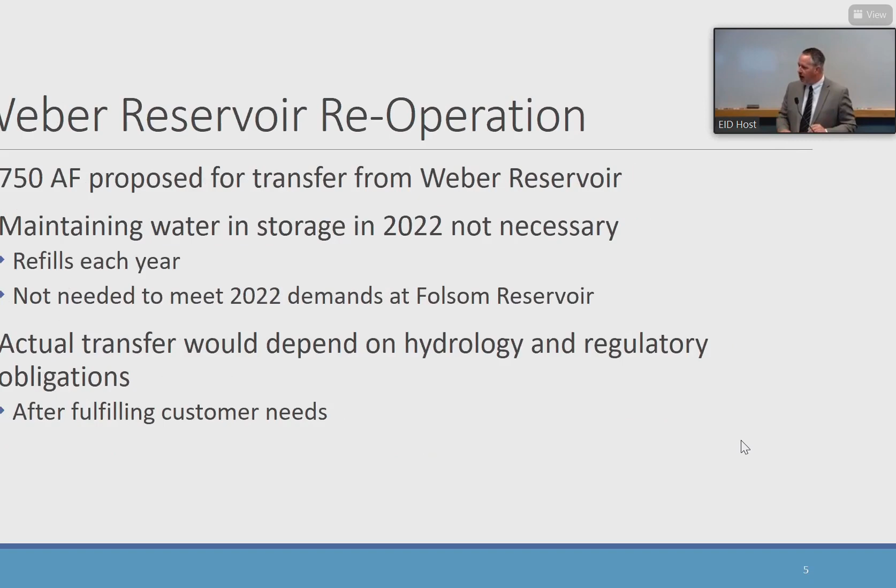We know that this reservoir refills every year, so even if we did transfer it, because it's so undersized for the amount of the watershed -- and we can see that occurring now -- we know for sure that it would refill even if we did transfer that water. But the actual amount that would be transferred in the end was really subject to hydrology and what actually occurs, as well as the regulatory timelines.

All right, so the second source is conserved water transfers.

This is the number that Director Anzini talked about, the 1,800 acre-feet, and that's really an average of historical performance of the ditch from, I believe, 2009 to 2016. But as we look at the current year hydrology, knowing, as Brian said, we wouldn't be online the first part of the year, we might save up to about 1,800 acre-feet. We always propose a maximum -- we don't want to leave water on the table that could have been transferred. As Brian described, the actual amount conserved last year was about, I think, 1,100. But nevertheless, that was the genesis of that number.

We weren't able to use that water. We didn't need that water, and it turns out we can't use it down at Folsom Reservoir -- this particular pre-1914 water right is not available downstream.

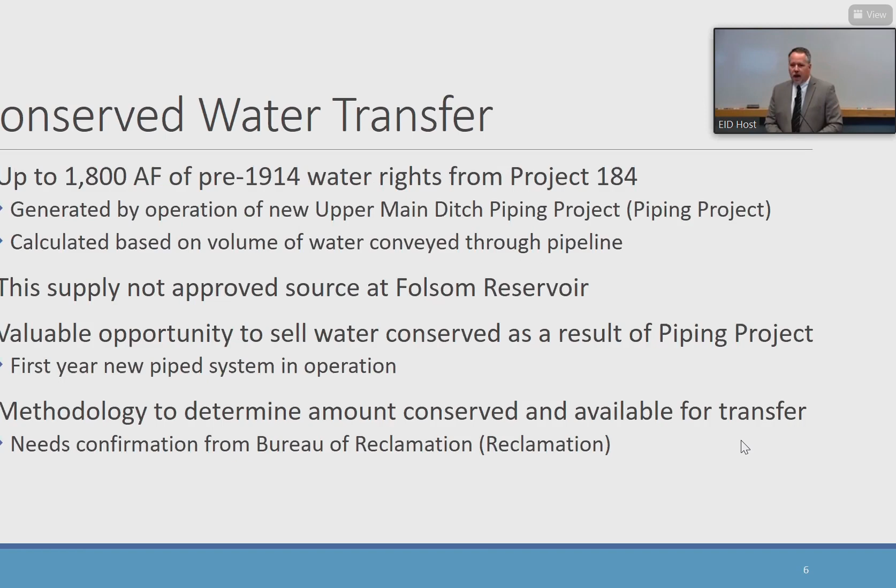So it was just water that would not otherwise be able to go to the district's benefit. This also was actually the first time that this potential source of water could be available, because obviously having the pipeline successfully completed. But there's one significant hurdle to go over, and that is achieving consensus on the methodology. We feel convicted and strong in our calculations and amount of water that's actually saved. Nevertheless, the water having to go through reclamation facilities, they have to be in agreement with the actual amount of water. And that process continues, as I'll describe going forward.

As a recap of what we actually transferred, just under 600 acre feet after we take out our various deductions for losses, et cetera. All of that water last year was only provided by Weber Reservoir. Unfortunately, we weren't able to transfer any conserved water. There's a couple challenges. Obviously, we were later than we typically were last year because we were benefited by those late spring storms, as you recall. And so we weren't in a position early in the year to go out to market to start the typical processes that our great environmental review folks start early in the spring. So we started a little later. But really the main challenge was that methodology.

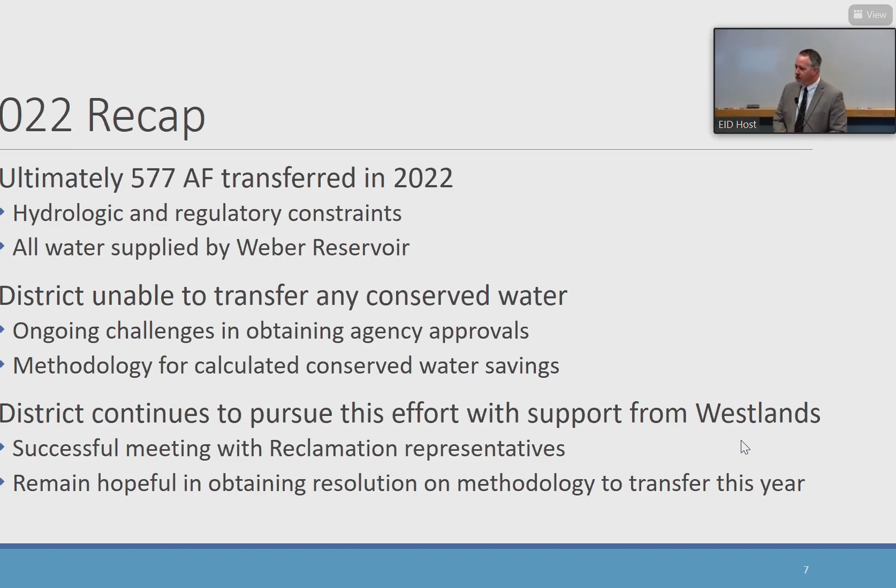I can say it's fortunate that we continue to have Westlands be a partner and help advocate with us for this process. And we did actually have the district and reclamation had a very successful meeting last month. So we're continuing to pursue with the hope and expectation that if there is capacity to transfer water this year, we're maintaining the course, and our goal is to try to transfer water this year in the event that there is the ability to do so.

Next slide, please. So overall, not too bad, honestly.

Almost $500,000 in non-rate revenue that came to the district from water that would have spilled on New Year's Eve. So remember, that reservoir would have filled up, it would have just spilled last year, and would have went right down through Folsom and out to the Delta. So it really just shows the importance and the strategy, if we can do this right, if we release water at the right time, how it could be beneficial to us, beneficial to the buyers, and in this case, beneficial to reclamation. They obviously didn't waste that water, went through their generators as well, rather than spilling it the next winter. And beneficial to the ratepayers, most importantly.

Next slide, please. There's one major challenge with our reservoir reoperation transfers, and these are what we term refill agreements. Basically, Reclamation and Department of Water Resources hold the key to the gates, right? So we have to go through their facilities in order to transfer this water to our proposed buyers. Depending upon the year, whether or not it goes to the state or federal water projects, they have to be convinced that that available capacity, that hole, if you will, in the reservoir will be refilled at a time that doesn't impact their reservoirs.

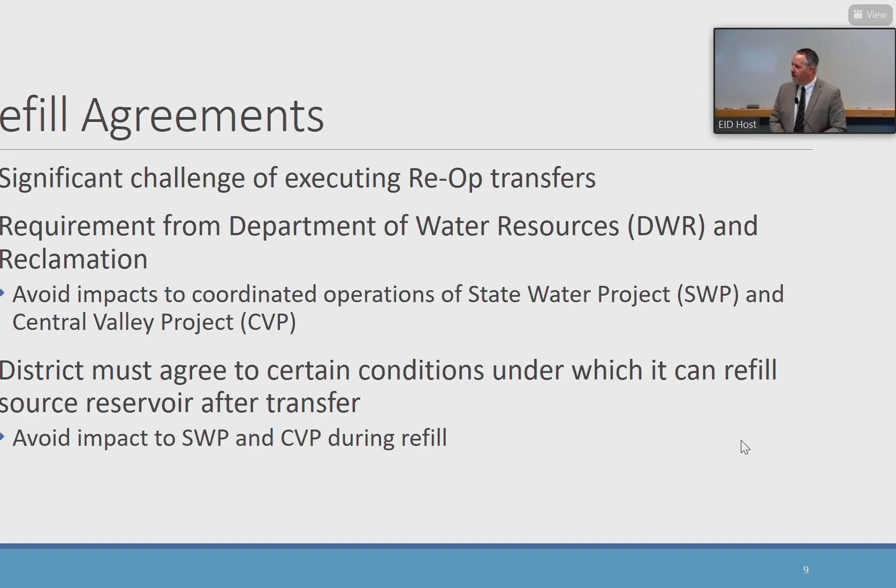Obviously, last year, they were very concerned about the ability to refill this year. Fortunately, Mother Nature has helped us along. We were successful in having, once again, reasonable agreements. We always think that they're definitely very protective of this, the DWR's and Reclamation's interests, but there were conditions that we felt we were comfortable in agreeing to in order to complete those transfers. Next slide.

So you notice how I only described Weber Reservoir last year, and that's because, unfortunately, after the 2020 transfer, we were definitely able to meet our own customers' needs, but we weren't quite able, because of that subsequent year hydrology in 21 and 22, to really eliminate our refill debt, to pay back and fill that at a time when the entire Sacramento-San Joaquin watershed was very constrained in the amount of refill. So we were able to refill enough to meet our needs, but we still carried that refill reservation of over 7,000 acre feet from that prior transfer for 2 consecutive years. Not ideal, but that's sort of the rules of the game, and we felt comfortable being able to do that and still meet our customers' needs.

Which obviously precludes us from proposing—we don't want to make a larger hole in our reservoir, because then we wouldn't be able to meet our own customers' needs.

Next slide, please. Obviously things change very rapidly, in about a week or a week and a half we were able to completely eliminate this entire refill reservation. No one needs to be reminded of our New Year's storms. So once again we have the ability to market these supplies, if there is available need and capacity, through the state and federal projects in 2023. Right now there may be enough project water, but they don't have the ability to even move water if we did find a buyer. Nevertheless, we sort of reset the clock, and we're ready to start over when the iron's hot.

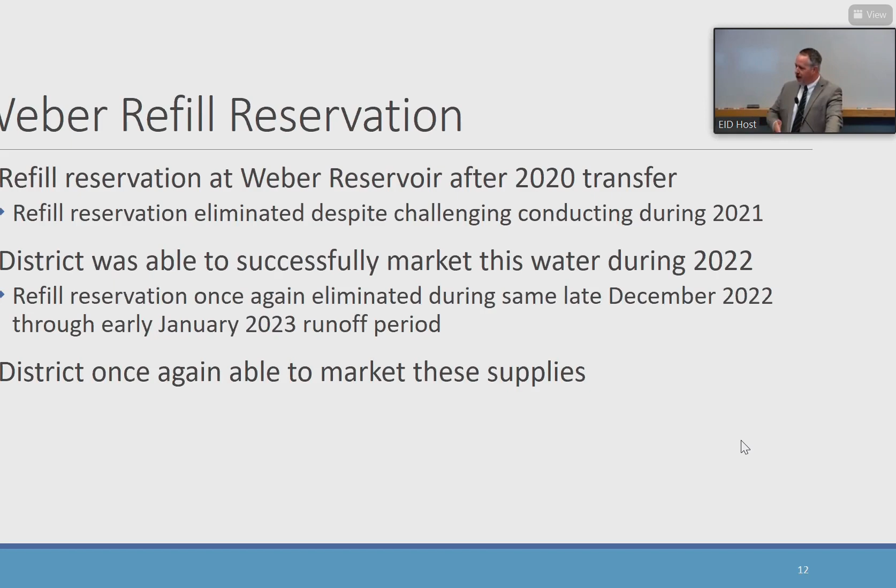So just a quick year in review. Obviously the extreme hydrology—we went from drought to flood very quickly, so we hit both ends of the spectrum. That constrained our ability in the amount we could transfer last year, but at the same time it also helped us reset our refill obligations. And then also the ongoing regulatory challenges that affect our ability to move that conserved water, but our staff continues to pursue that, and we're making incremental progress.

Next slide, please. So no options today, and the picture we leave you with is Weber Reservoir. I think Director Anzini and Dwyer were able to go out and see it. This small little reservoir, the little engine that could, provided $500,000 in non-rate revenue to the district last year. So even though I'm doing the presentation today, I always want to take the opportunity to recognize Brian Deason and Elizabeth Leeper in the background for a lot of the legwork—I'd say almost all of the legwork—to make this happen. So it's really always a team effort on these things; a lot goes into it. That's all I have.

Any questions for Dan? Comments?

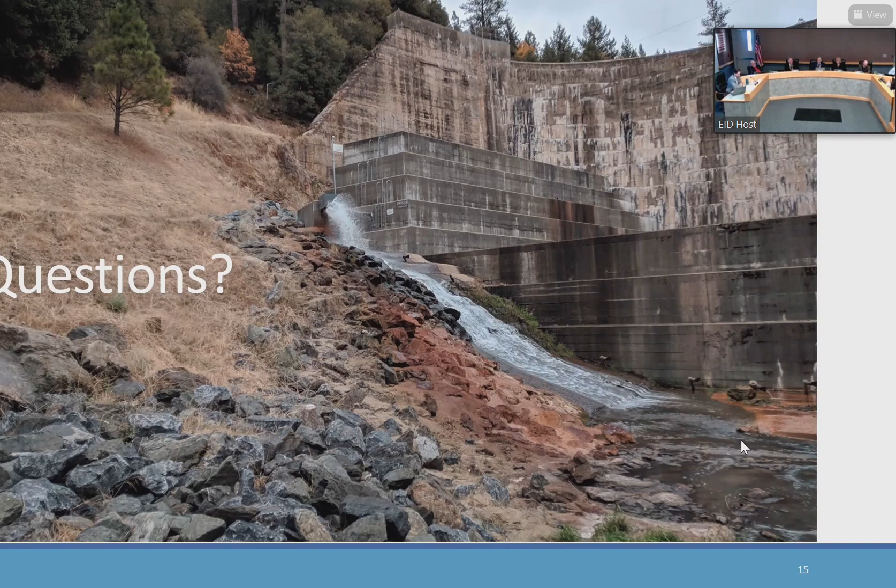Yes, Director Dwyer? Yeah, I guess with the law of supply and demand, with the abundance of runoff we've had since our events this year, what effect does that have on the overall price for our transferred water?

Yeah, it has two factors: the price and the actual availability. We haven't seen any proposed cost schedules for this year yet, but I would anticipate it to be lower than last year because of simple supply and demand—more people will be able to sell water this year than last year. But probably more constraining is the ability, when the state and federal projects, Central Valley Project and State Water Project, were constructed—they weren't constructed for non-project water. So we take advantage of available capacity during low yield years. Based on being in this for 8 years now, it's kind of that 30, 40, maybe 50% of their available water, then they'll have available capacity for non-project transfers. We're getting close to that threshold, so if we get a few more storms, it just might not even be possible—even if someone did want to purchase water, we'd have to be able to get that water through. So we're obviously watching it very closely.

Director Anzini? Hang on, George. Yeah, just a couple of remarks here, and it has to do with the supply that we're refreshing.

I want to compare us to much smaller water districts down the hill in Calaveras and Tuolumne. These smaller water districts are having a real problem. We're fortunate because of our investment in our delivery system—these smaller districts have been asked to conserve 30%, as EID has been doing, for their customers to conserve water in order to be good for the next year. But the smaller water districts have been conserving it in the pipes, and now when they let it go, they don't have the filtering systems that we have, so their water is coming out tainted. That's because they've been holding the water, and now they have to spend an extreme amount of money to filter it and make it usable for their ratepayers. Of course, we're a mid-range water company compared to them, but we are blessed with all this snow, as they are, but they don't have the facilities to capture it like we do.

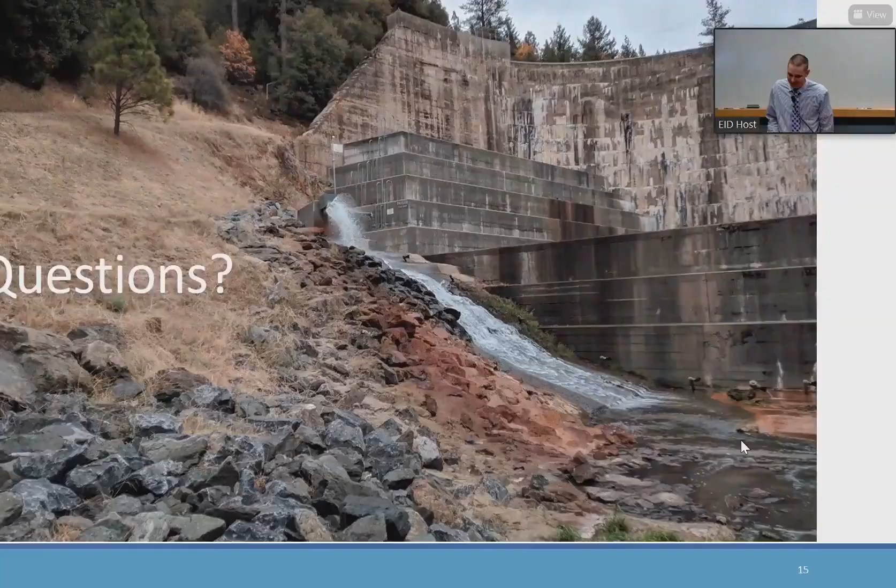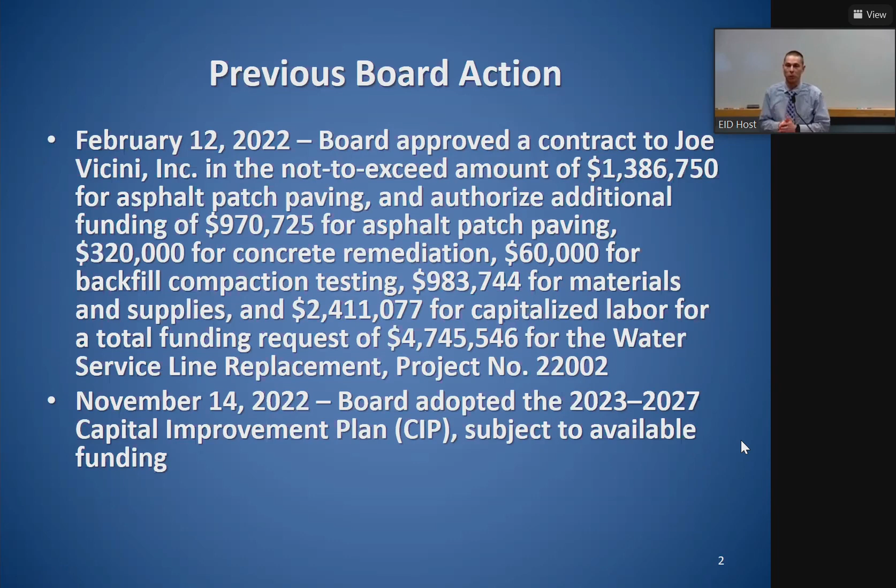Good morning. Drinking Water Operations Manager Patrick Wilson, presenting today on the Drinking Water Construction Service Line Replacement Project funding request. Next slide please. In previous board actions, the board has approved construction funding for in-house staff to perform the replacement of much-needed service lines on the system, as well as, in February of last year, with Joe Vicini for patch paving. Subsequently in November of last year, the board adopted the 2023 through 2027 capital improvement plan, which included this project.

Next slide please. So just an overview of the service lines: we have 44,310 water service lines. The crew replaced 577 lines in 2022.

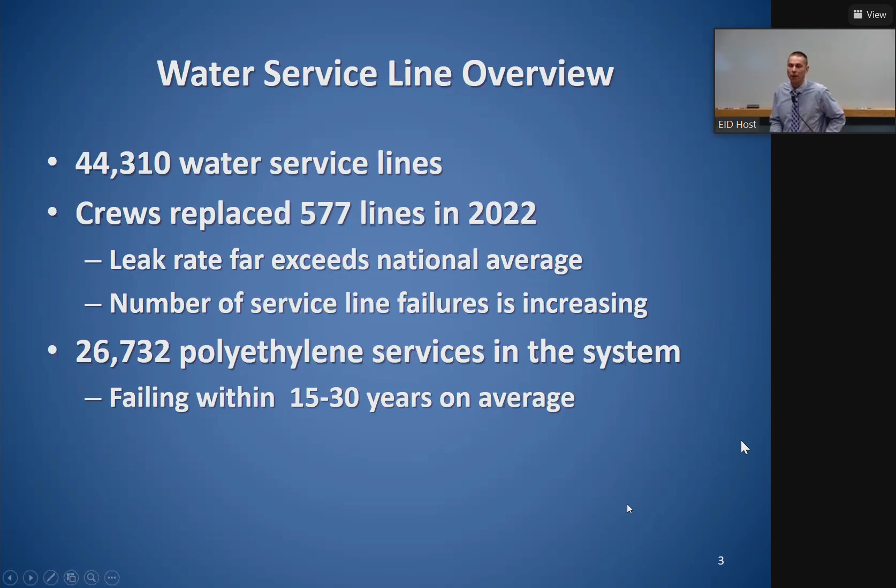The leak rate still continues to far exceed the national average, which you'll see in a future slide, because the number of service line failures continues to increase. Right now we have 26,732 poly service lines in the system.

They're failing within about a 15 to 30 year service life on average. So the objectives are to reduce the failure rate below the national average with proactive replacement, and we're replacing these polyethylene services with copper service tubing.

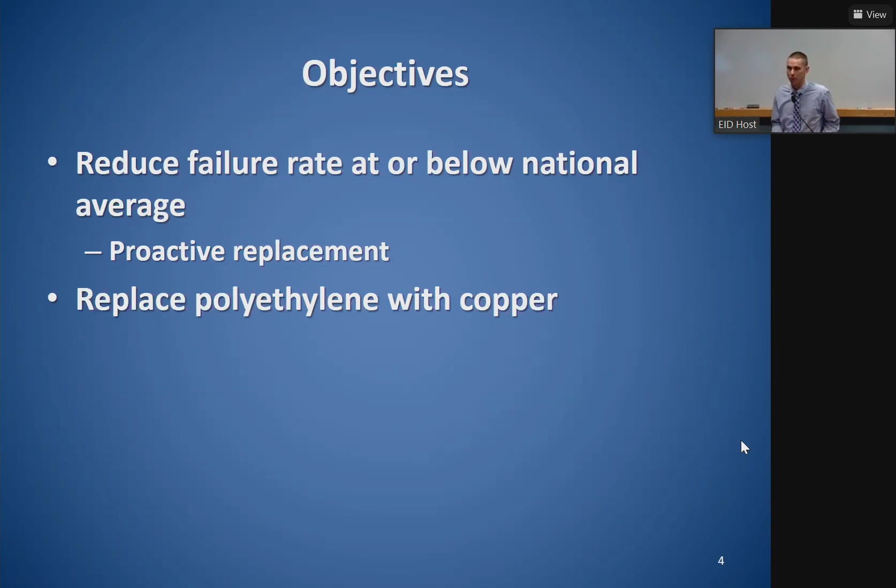This project does include a 5-year CIP of a little over $23 million, and this year we have a CIP budget approved of $4.25 million.

Next slide. So some of the challenges we've been experiencing: the current leak response requirements have continued to increase with unplanned full replacement services, as well as staffing challenges due to attrition from everything from promotions to retirements to leaving the division or the district altogether. So we have 14 of the 27 within construction that are within 1 year of employment still to this day.

This project requires detailed training. It's not the standard replacement you'd anticipate from a repair. There's a lot of planning involved, everything from customer notification to material handling, and really planning day-to-day operations. These guys are basically foremen, if anything, for what major construction crews would be outside of the district. So the planning alongside that takes very detailed training and has to be very methodical in order to be efficient.

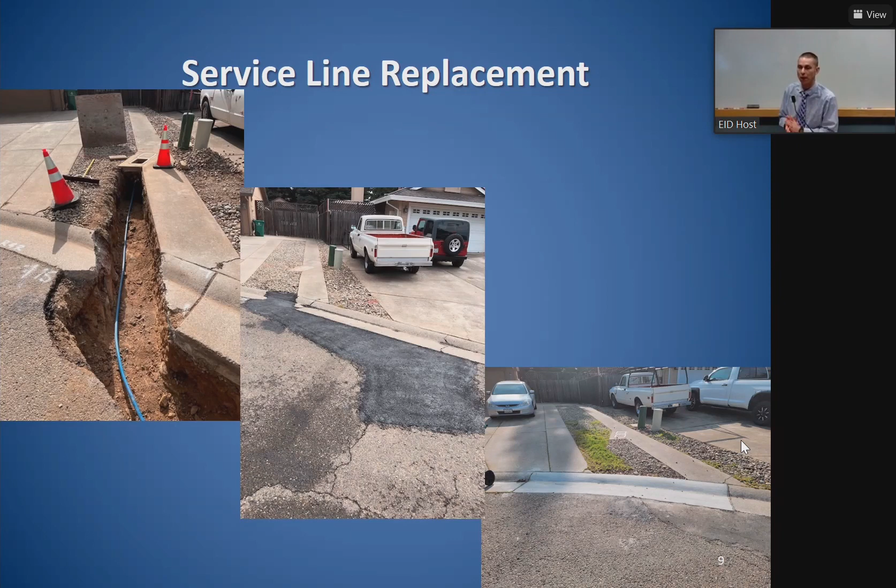So the funding breakdown: capitalized labor, a little over $2.1 million. Asphalt patch paving, about $869,000. Material and supplies, including copper service tubing and all fittings necessary to make those connections, $537,000 and change. Sand and gravel for backfill, $343,000 and change. Compaction testing and county inspections - as part of our aggregate-based backfill within the county right-of-way, we're required to take compaction testing, using a third-party vendor from our on-call list, then coordinating with the county on those results. Finally, any locations needing concrete remediation services, about $286,000, totaling the $4.25 million CIP budgeted request.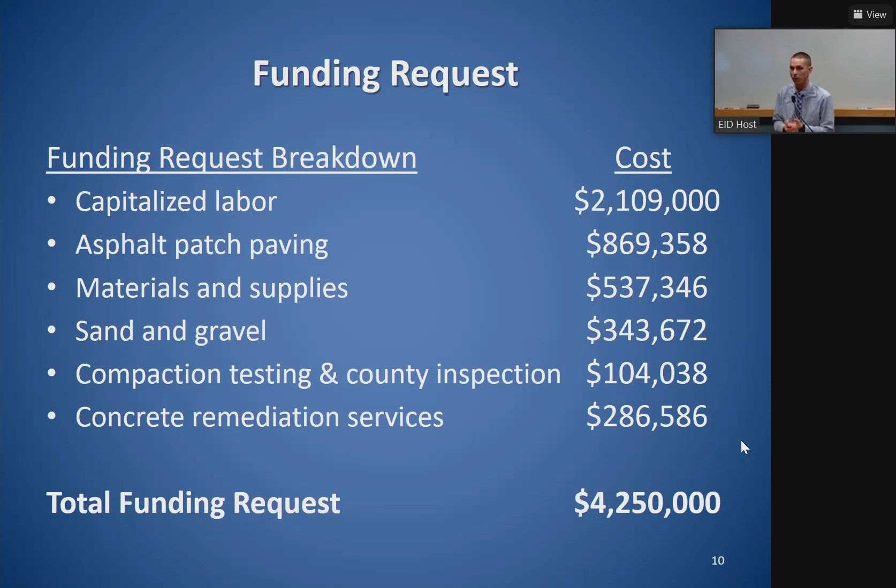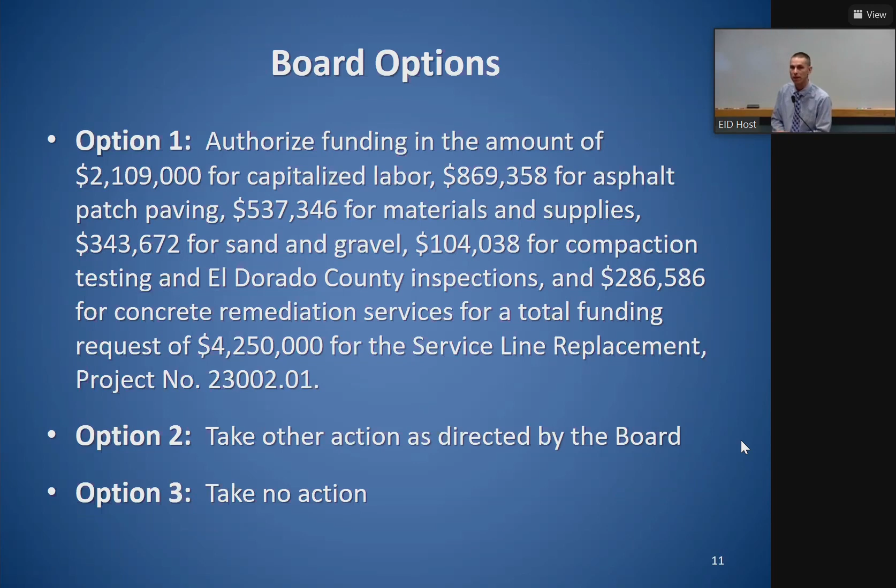Board options, option 1, authorize funding in the amount of $2,109,000 for capitalized labor, $869,358 for asphalt patch paving, $537,346 for materials and supplies, $343,672 for sand and gravel, $104,038 for compaction testing and El Dorado County inspections, and $286,586 for concrete remediation services, for a total funding request of $4.25 million for the Service Line Replacement Project, Project No. 23002.01.

Any questions of Patrick? Do we have a motion? I'll move option 1 with a question. Okay, do we have a second? I'll second it. Second by Director Anzini.

Patrick, we were doing okay in '21. To what do you attribute the real decline in the planned replacement as opposed to the unplanned? You mentioned staffing issues, is that the real driver?

That's the real driver. I think we have seen a slight uptick as well. That shouldn't be underscored here in terms of the unplanned, the failures as well. Because even shutting down Stonegate with the attrition of staff leaving and having to change over that whole group, with 14 of the 27, restarting that whole project itself this year, we still have seen a lot of service line failures that are increasing. And really it's just that poly aging out, and a lot of the same subdivisions that we're seeing targeted as spots to move forward with in the coming years, areas where we know we're going to head because of those unplanned repairs. It's really giving us a clearer view.

Thank you. That clears it up, that we've had an increase in the unplanned, so we have to pull our crews off of the plan to take care of that.

One last question. I think there was a class action suit against the supplier of the poly pipes. Any update on that, or is that going to just churn through the courts forever?

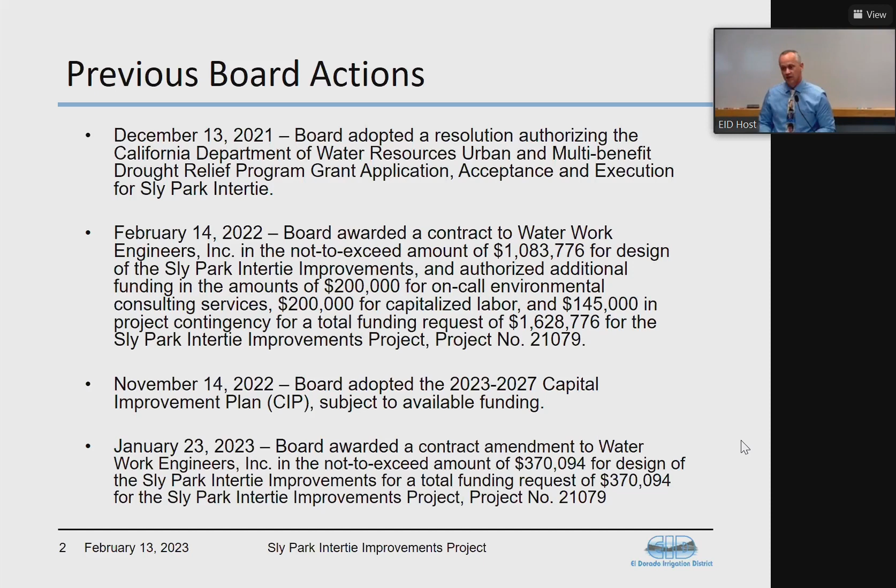So just a brief summary of why we are here today. The design of the Sly Park Intertie is underway. This morning we're discussing a few additional changes, or potential changes, to the project scope. The first two include additional pipeline sections identified after we analyzed the pipeline following the basic design report. The third is PG&E power coordination and design of backup generators for the proposed pump station at Reservoir A. And then additional design for additional points of connection at Reservoir A for operations.

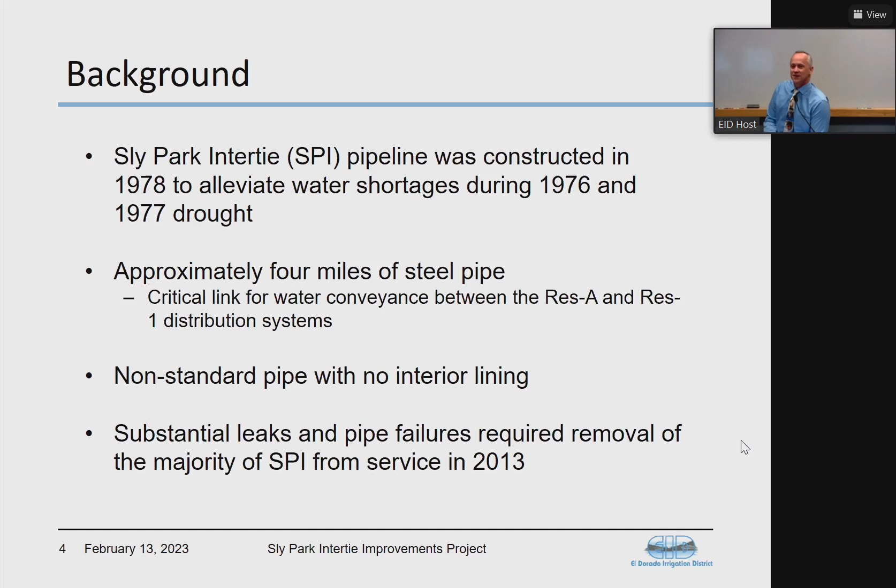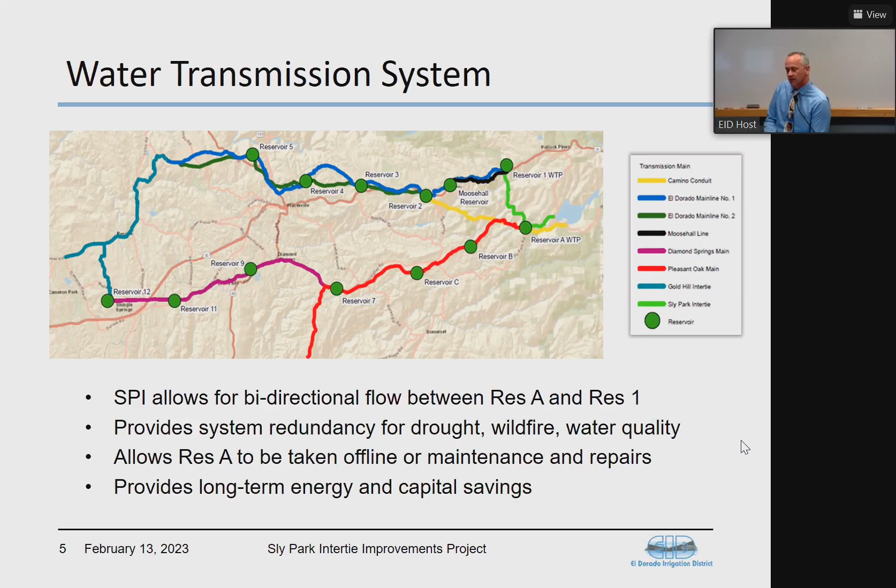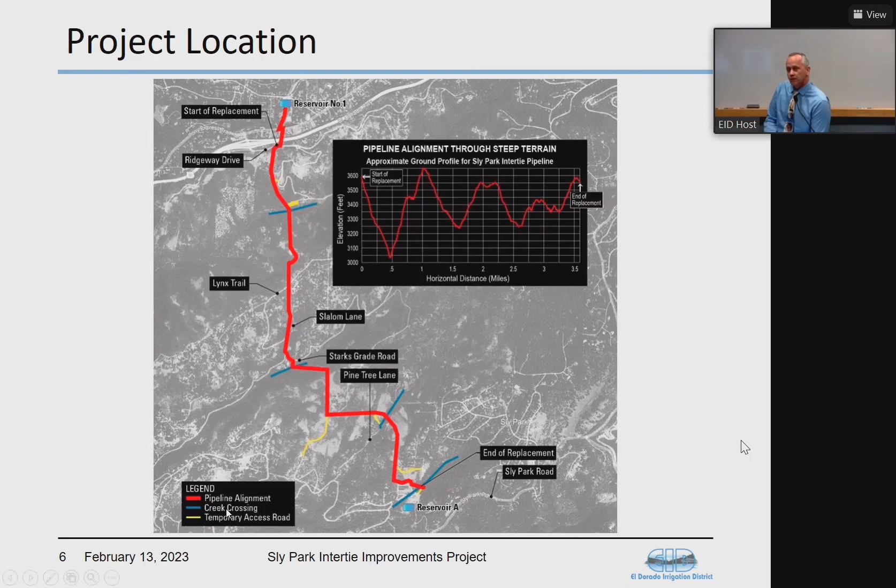Initially we were a little bit reluctant to include this in the project because it crosses Highway 50 and would likely really be expensive to replace that segment. It's kind of a substandard crossing on the south side of 50 there, it's almost a one-to-one slope coming down the hill. So we're talking some really expensive construction dollars to get this back in.

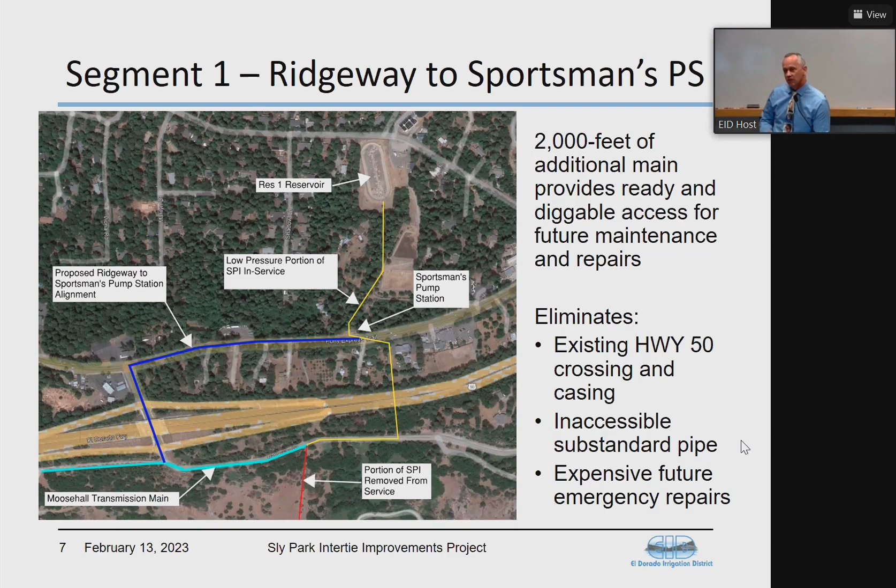The second design segment we're looking at is from kind of the head of Reservoir A up to our Sly Park Hills tank. So again, the segment in red is another portion of the Sly Park Intertie that's still in service.

that pool of water there with the Sly Park Intertie buried in it. They'd already dug that section up twice for repairs, and as we were there, the water was churning on top as they were trying to isolate yet another couple of repairs. If you make an about face from that pool, there's another exposed joint, and you can see the pinholes that we're experiencing throughout that pipe as it continues to degrade.

It's important to note that this project was already previously identified by the district and is included in the current CIP. We're just looking for some efficiencies on both the design and on construction dollars on the back end. We've asked Water Work Engineers to propose rolling this into the larger project.

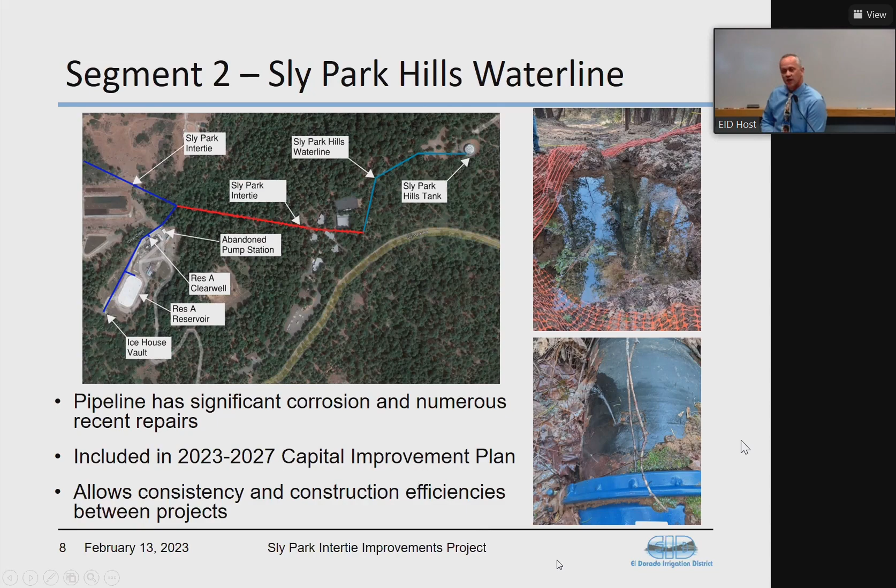The third consideration we're taking into account is that initially we weren't considering backup power for the new pump station proposed at Reservoir A. There is backup power at Reservoir A, but it's only enough to run the station at this time. So under all circumstances, we're going to need backup power at the new pump station in case the reservoir is offline.

There's also ongoing coordination efforts with PG&E to provide service to that new pump station. Their general policy is that they'll give you one service per parcel, and we have multiple parcels that have multiple services. So that's kind of a hassle going back and forth between us and PG&E, finding a doable outcome on those parcels.

Next slide, please. The fourth is we basically initially considered a point-to-point connection, Res 1 to Res A. As we got into the nuances of how the water treatment plant is operated, and all the different scenarios where we can take the plant offline or the reservoir offline, we opted to include 2 additional points of connection. That gives us the ability to isolate Reservoir A itself, and also use that for storage if we have projects where we take Reservoir A completely off, or the Res A treatment plant completely offline.

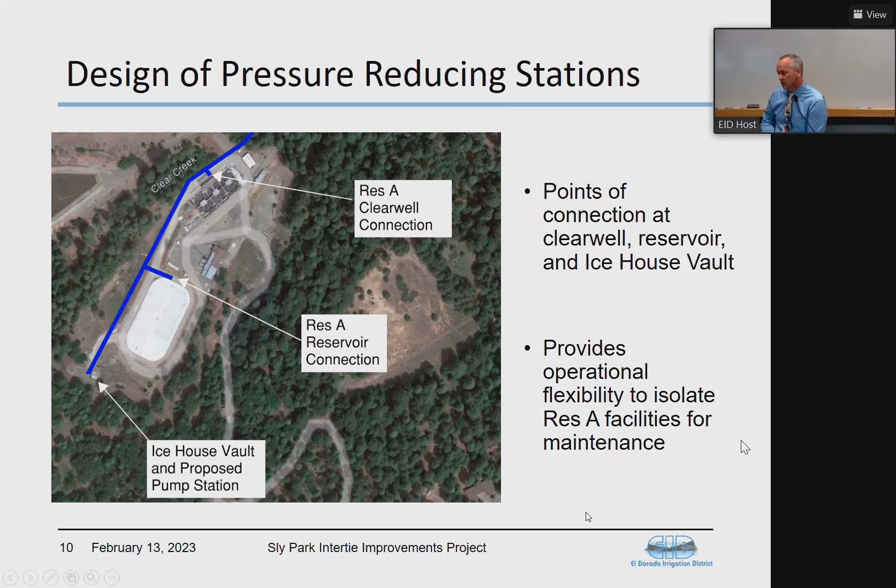So in total, with those 4 design elements, we're looking at approximately another $370,000 in engineering costs for this project, which is what we're asking the board to approve today.

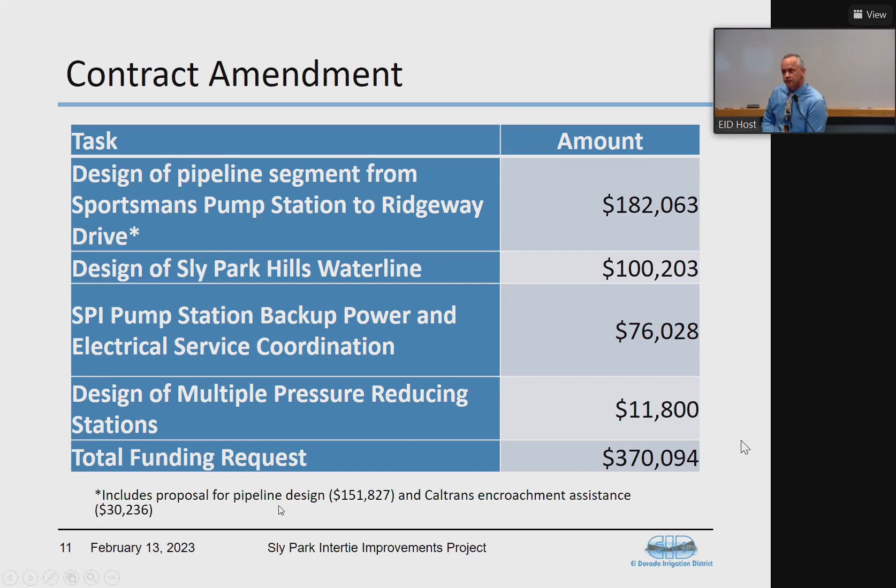Again, just a summary: some of the design costs are offset by a $750,000 grant with the County of El Dorado. Once we move into construction, we were successful in securing $10 million from the state DWR. The remainder of the funding is planned for a 2024 bond issuance.

By way of schedule, we are in the process of preparing the EIR. We will be meeting at the Pollock Pines Community Center on Wednesday of this week with the initial notice of that EIR, meeting with residents in the impacted area. We plan for design and environmental to be complete approximately by the end of the year, early next year, with construction beginning early 2024.

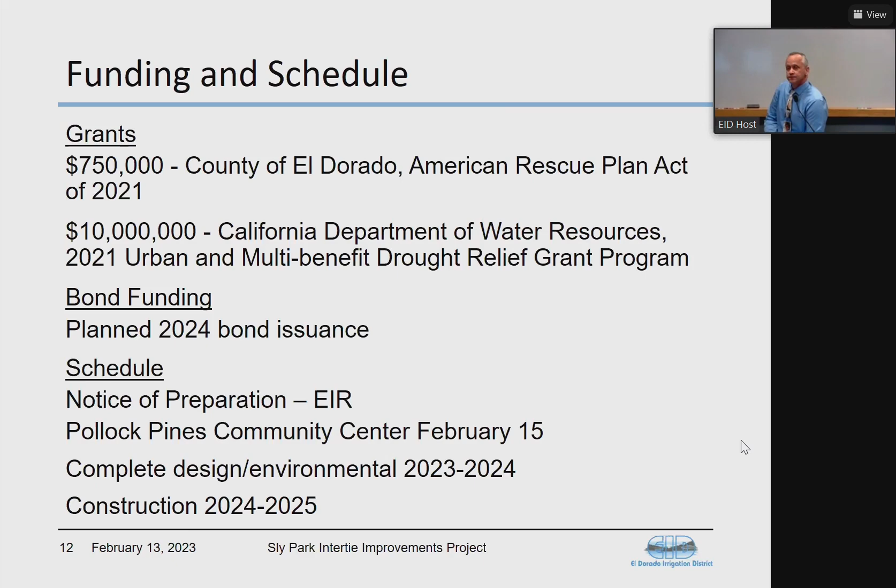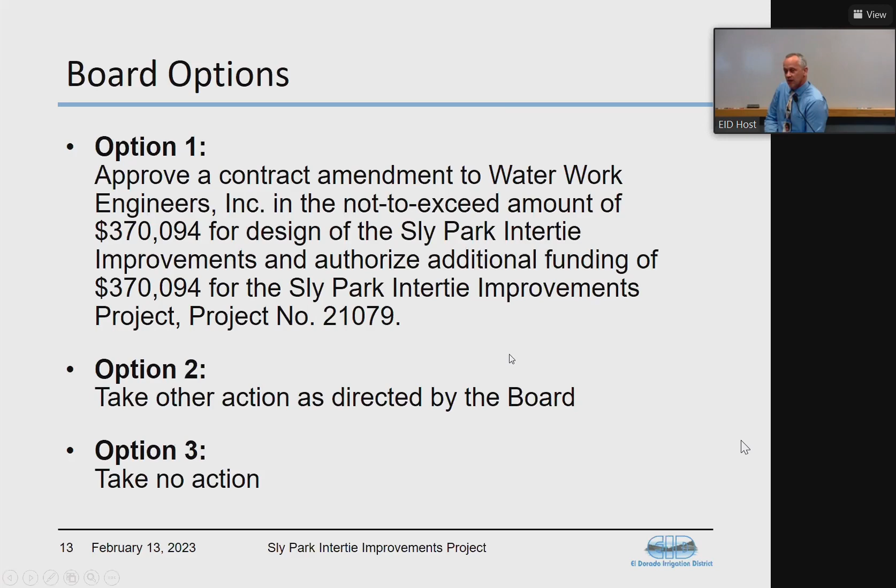So with that, option 1 is to approve a contract amendment with Water Work Engineers in the not to exceed amount of $370,094 for the design of Sly Park intertie improvements and authorize additional funding for that same amount. Option 2 is to take other action as directed by the board, and option 3 is to take no action.